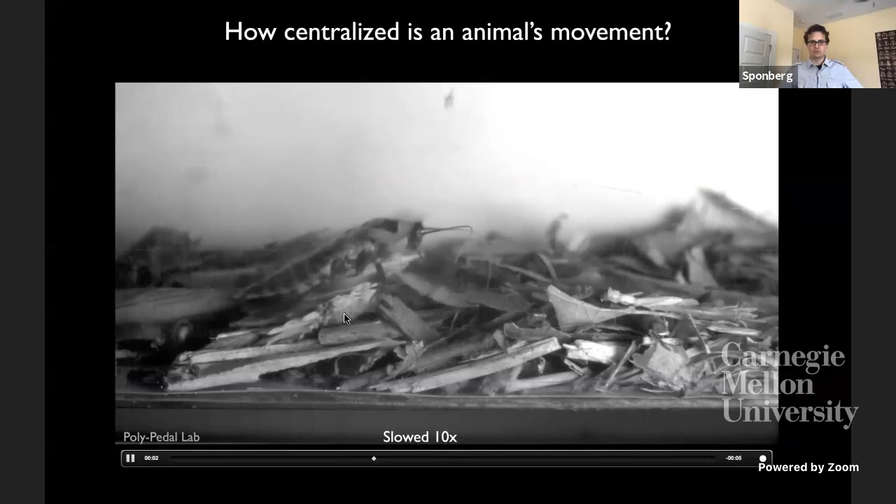So what Isaac wanted to do was ask how centralized is an animal's movement? We do a lot of work with cockroaches and other insects. There's been a lot of appreciation that when animals move across different kinds of terrain, they use different strategies of control. There's been a lot of focus on a feedback-to-feedforward kind of design strategy, where you listen a lot to feedback from your sensors, or you set your plan or model and go. But centralization has been thought to be an orthogonal axis to this organization.

This comes from a review by Phil Holmes, Dan Koditschek, John Guckenheimer, and Bob Full, with an earlier paper with Buehler. The idea of this orthogonal axis hasn't been very concretely defined. Of course, centralization has a concrete mathematical meaning — if we talk about a network diagram with nodes, the centrality of a node is a well-defined mathematical concept. But when we talk about it for locomotion, we mean something like how coupled are the distributed elements that are controlling the movement.

Don't worry too much about the details of these diagrams — the different clocks here are supposed to represent first and second order oscillators. The big thing about the centralized-to-decentralized axis is how much these are coupled to each other. So if we fit an animal, as it's moving, to a set of coupled oscillators, for example, we can define some aspect of centralization using that model framework.

But Isaac and I wanted to ask: is there a way we could assess the degree of centralization that an animal or a robot is moving with, without having to adopt a specific model architecture for it? Is there an empirical way we can measure this, and then assess how it changes as the animal changes strategy, or as we do something different with the robot?

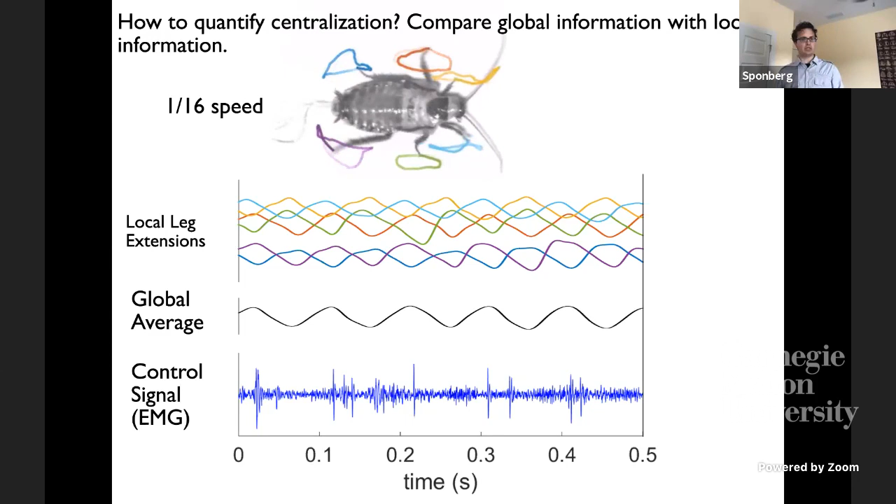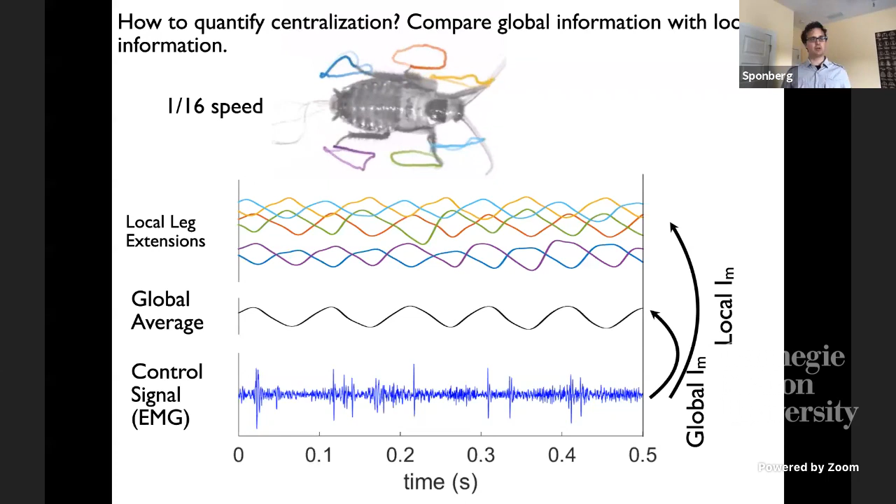And then Isaac tracked the 6 legs of the animal, and he could say, okay, how much local information is shared between that control signal and the state of the leg that that control signal comes from, in this case the hind left leg. And then he could ask how much global information is shared between the control signal and some global state representation, in this case the global phase average of all of the legs.

The advantage of using information is we can think of information in the currency of entropy, right? Entropy is the possible set of states that a signal can obtain weighted by how likely they are to occur. You can represent it by this area or circle here. So these are the possible different EMG patterns a cockroach leg could send on each stride, represented as an area, and there's some area of possible local outputs.

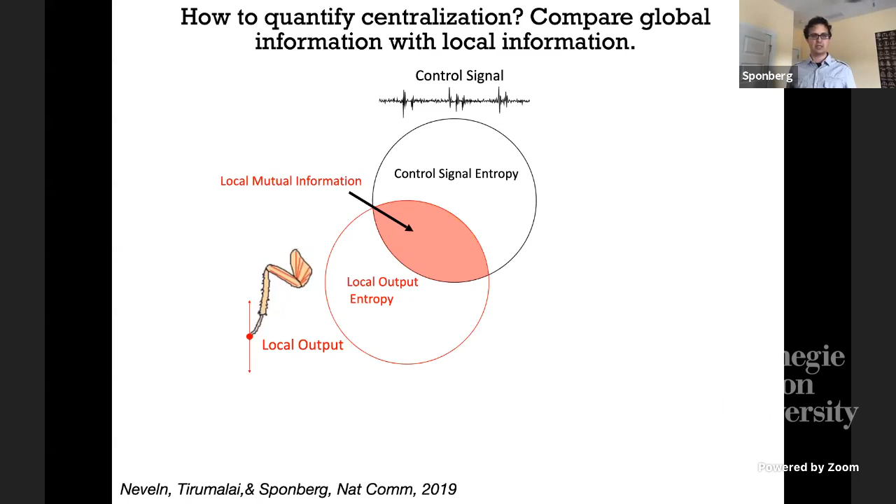And the more overlap between these circles, the more information is shared. So that means if I tell you what specific control signal went out, how well can you determine what the actual output of the local leg was? The more these overlap, the more your entropy of your local output is reduced, the less uncertain you are about the outcome. And so this can be a representation of local mutual information.

We can also do that for the global state representation. So we can look at the overlap between our global state and the control signal, and the overlap there will be the global mutual information.

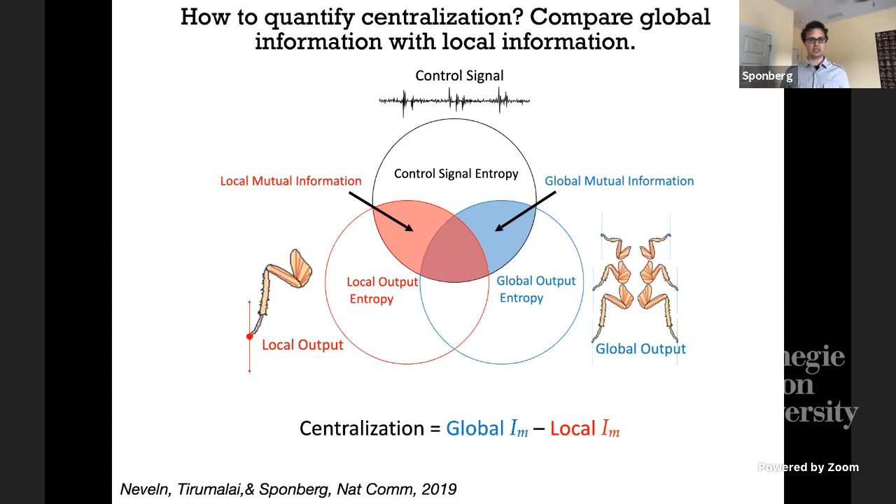And Isaac and I posed the idea that centralization then can be thought of as a difference. And since these are in log units, this is like a ratio actually, between the global mutual information and the local mutual information. So when centralization is positive, it means the control signal tells you more about what the global state of the system is doing. And when it's negative, it tells you more about what the local state of the system is doing.

Interestingly, there can also be redundancy here. This can be measured as what's called co-information. That's because your local state is going to share some information with your global state. Of course, where the leg is will determine something about the average state of all the legs, because it's one of the legs. So there's going to be some overlap here, and that can be captured as a measure of redundancy, the amount of overlap between those regions.

The nice thing about this is we can make those measurements without having to assume any underlying model. We do need a state representation of the system, but that's it. So when we do this for the cockroaches, we can calculate that for many cockroaches running over hundreds of steps with natural variation on low roughness terrain. And what we can see is that those EMG signals in the key control muscles we're recording in the leg convey quite a bit of both local and global information.

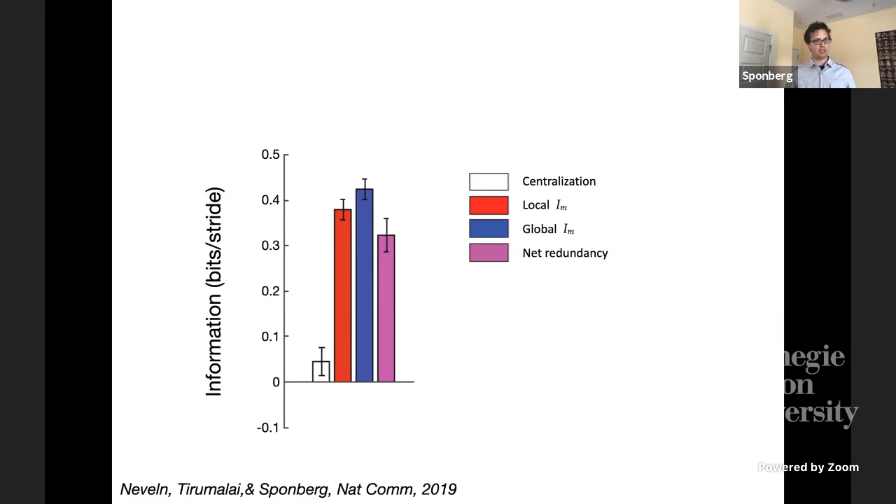But the key thing to take home from this plot is that the centralization is actually net positive. And this has an important implication that demonstrates one of the interesting things you can come across with this technique. The fact that that value, that white bar right here, is positive, means that if I record the activity of an EMG in a single one of the 6 legs, it tells you more about what all 6 legs are doing on average than it tells you about what that specific leg is doing.

That's a little weird if you think about it for a second. It's saying, even though the EMG is contributing to the extension of the limb, because of how coordinated the response to perturbations are in the system, that EMG is actually telling you more about what all of the legs are doing together than that one leg is, from an information standpoint.

And so we think that this is an indication. Part of the reason why we did this with cockroaches is they've been thought to be very decentralized in their control architectures, and we wanted to test that.

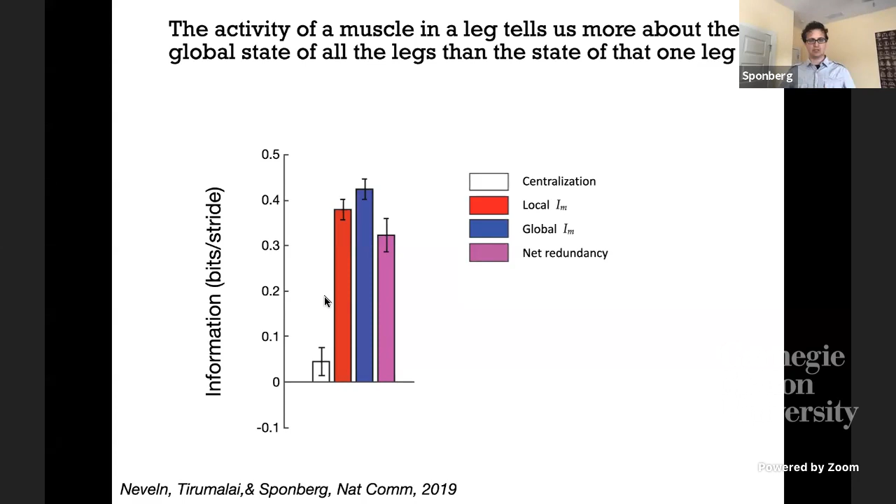So can we make this a little more concrete? Can we say, is this a good measure? One of the other reasons why we did this with cockroaches is this kind of approach has actually been used before, these species have been used before to try and assess centralization.

This was done by Einat Fuchs and Phil Holmes, where they did a very similar experiment where they tracked all the legs, and then they actually fit the cockroach's six legs to a coupled oscillator model. This is sort of like a Kuramoto model with not fully global coupling, but sort of a network diagram of couplings between the different legs. Fuchs and Holmes set all of these couplings to be equal to each other, and you can think of each of the legs as an oscillator connected to each other oscillator.

Each leg, I, is going to be evolving in time with some phase velocity that's dependent on an innate frequency and then some coupling. So if one of the legs gets ahead of where it's supposed to be ahead of this 0.5 phase difference, then the other legs will try to catch up with that.

When they fit models with different levels of coupling strengths, they found that a coupling strength of 79 radians per second tends to best fit the cockroach data set. That number shouldn't have much meaning yet, but the idea is that from these models, they were able to fit a coupling strength, which is one measure, given this modeling framework, of how centralized the system is. So for a coupled oscillator model network, the degree of global coupling can tell you about how centralized it is.

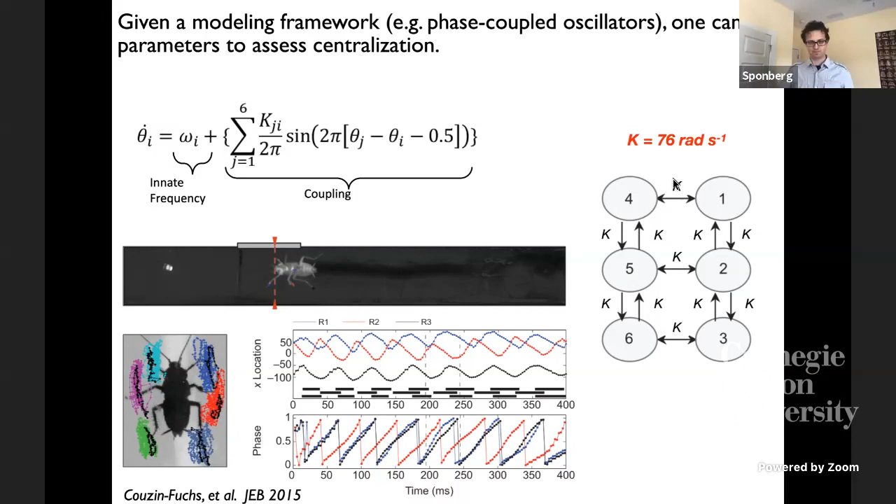You can also do this with order parameters if you want. So what we wanted to do was ask, how does that match up with our data? So we took our same approach, but instead of running it on cockroaches, we actually ran it directly on the oscillator model. We took a coupled oscillator model with similar connectivity.

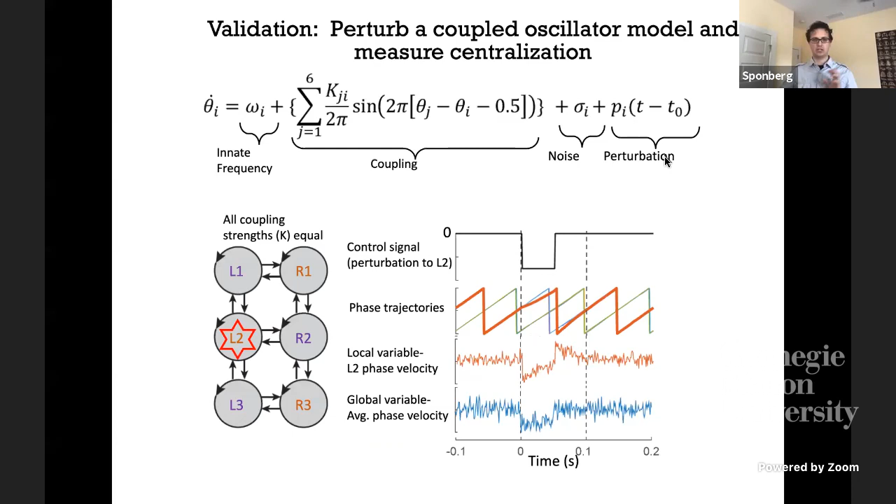We added noise and we added a perturbation to it, and so we could play that perturbation and that actually becomes your control signal. Then you could look at the outputs and ask how they're related to one another. And as we see, the centralization increases with coupling strength, which is what you would expect. This is what we'd expect.

This is with an undergraduate, Amelia, that was in the lab. But interestingly, our value of centralization that we measured purely from the cockroach experiments, without having to use a coupled oscillator model, was about 0.2 bits per stride. And that matches up very well with the coupling strength that Couzin-Fuchs measured when they assumed the underlying coupled oscillator model for the cockroaches. So we get some validation that our empirical measure of centralization can at least recapitulate earlier data.

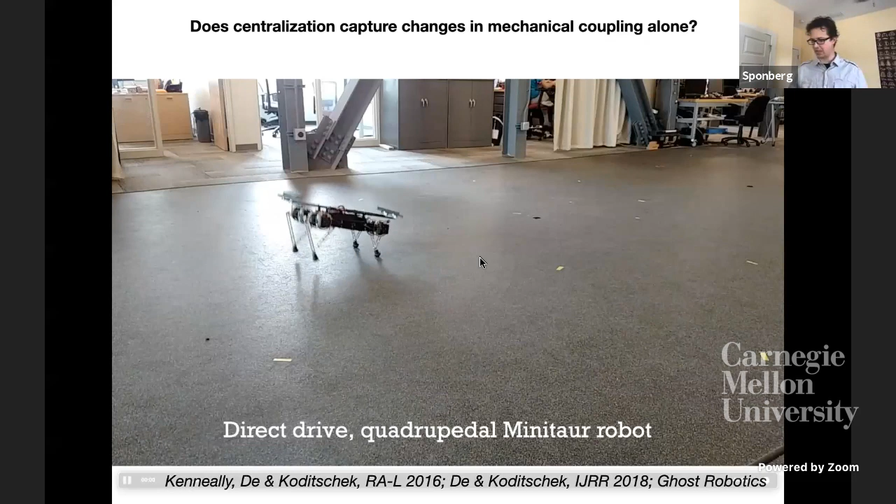The last thing I wanted to show is that this can actually be extended to think of new hypotheses of how the system is working. So we turn to a robotic system. This is the quadrupedal robot Minitaur from Ghost Robotics, developed by Avik De and Dan Koditschek.

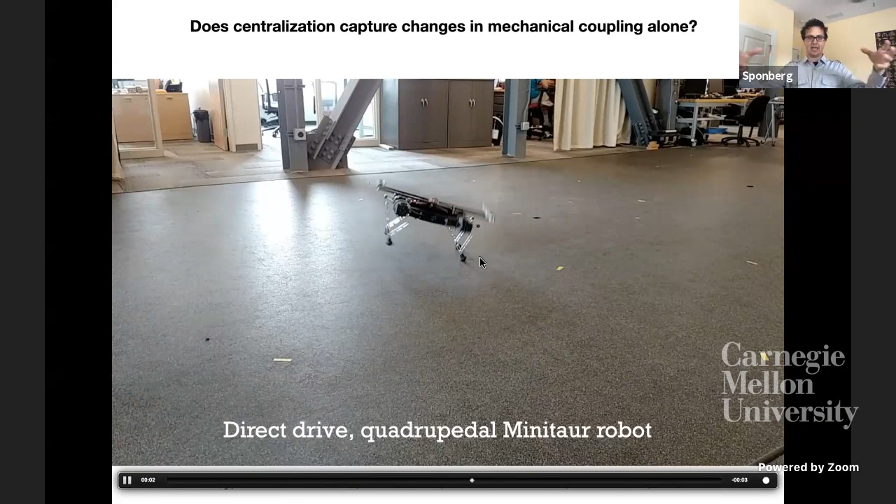The cool thing about this model is it has direct drive legs, so the legs are not fully determined by what the motors are doing, they can be back driven. And it has these masses on a boom that stick out from the top of the robot. By changing those masses, you can change the degree of mechanical coupling in the system independent of the controller. So what you can do is spread the mass—if it's really tight into the middle, then when you apply an impulse to the front set of legs, it's going to cause the back set of legs to move down, because the center of percussion, the stationary point around which the robot rotates, is going to be in front of the hips.

If the masses are really distributed far out, then the center of percussion is going to be behind, and when the front legs push on the ground, the back hip is going to move up. But there's a point right in the middle where the center of percussion is aligned above the legs. And at exactly that point, the front legs and the back legs are going to be mechanically mostly decoupled.

That means they're not going to apply moments to each of the other hips. And so the prediction would be that that should then become the most decentralized point, independent of the controllers being used, since we're changing the mechanical coupling now.

So Isaac ran our information theoretic approach on this. And indeed, what he found is that just by recording the robot as it's moving around, not by going in and trying to model it, just recording the kinematics of how it was moving using a global and local state estimation, he was able to recapitulate this idea that they are in fact adopting their most decentralized control down here when they're having those legs directly positioned below the centers of percussion.

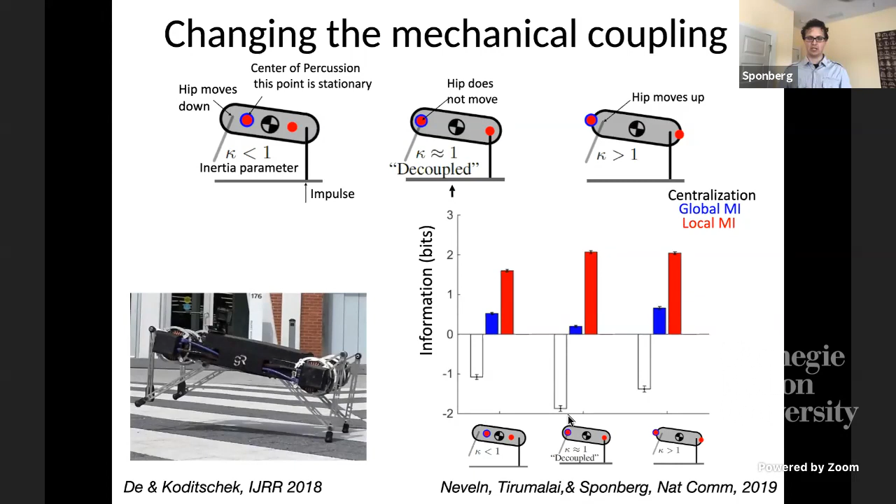And so altogether, we think that this information strategy can be used as a design space here, both for placing animals as they maybe are changing their situations or the environments they're running through, or aging, or having some damage or injury, but also for robots.

So on the left side here, a robot or an animal would be highly decentralized. That means the control signal primarily determines the local state of the individual limb or joint. On the right side, it would be highly centralized. The control signal is mostly determining the global state.

And then on the y-axis, we have the degree of redundancy, going from fully redundant, which would be very stiff systems, to less redundant. And we can put all of our robot, cockroach, and coupled oscillator models on there, and you can see that we can span at least the upper side of this space.

And we think that things like very stiff systems that are very rigidly connected together mechanically, it's very hard to do anything different from your local state to your global state. So those systems are actually going to be highly redundant, not either centralized or decentralized.

But the sort of classic reflex-based control, where you take care of perturbations entirely locally, would be a very decentralized architecture. A sort of very model-heavy control, where you're primarily doing your control based on some central model of what the global state is evolving in time, that would be highly centralized.

And then maybe soft systems actually have this region where there's synergy, where you know something more if you know both the local state and the global state than if you just know them independently.

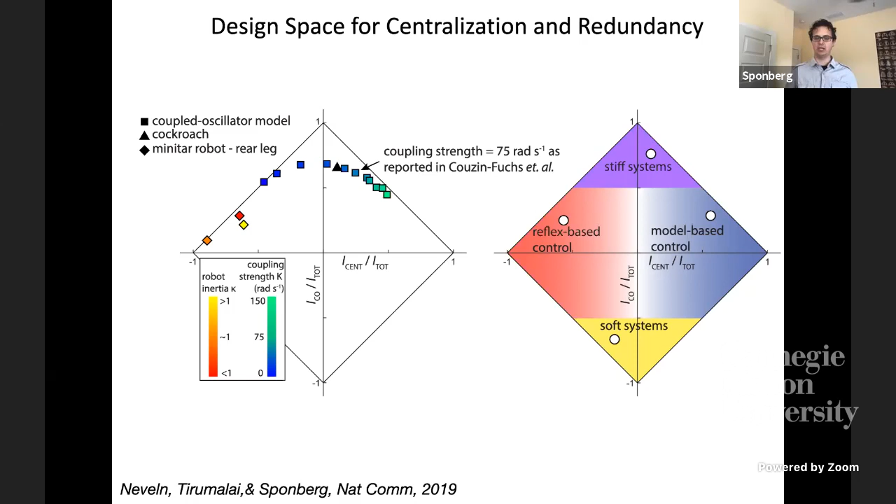So this whole strategy is, we were trying to find a model-free, not state-free, but model-free information-based measure for centralization and redundancy, so we could try and assess this broadly in the systems and ask when is centralization good and when is it not.

We can recapitulate the coupled oscillator model, and we can show that this actually allows us to capture changes in mechanical coupling in a robophysical model. And so with that, I'll just thank the people in my lab and turn it over to questions.

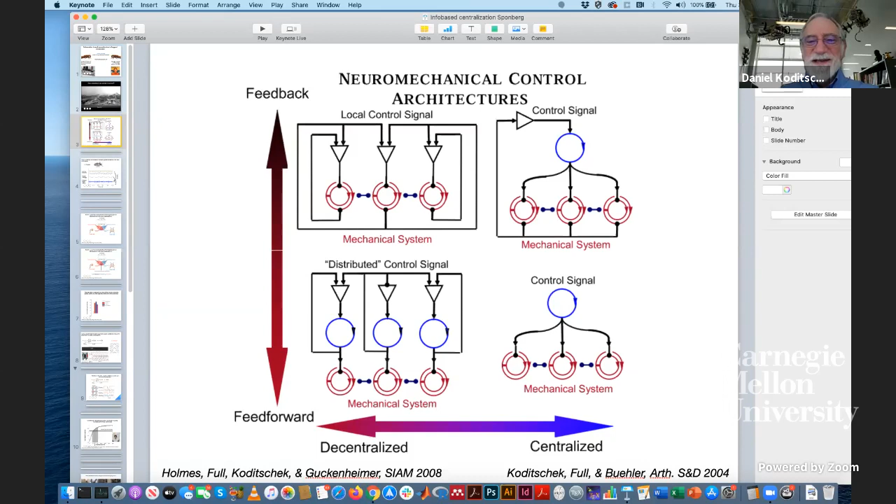I am confused. When Phil set the coupled oscillators thing up around the mid 80s, when these things were first getting off the ground, the presumption was always, quote, weak coupling, such that these Ks are going to be small enough that it makes sense to do this in the first order sense rather than going to the second order, blah blah blah.

What I'm confused about is if we have a relatively small K, an extended phase-based coupling according to Phil's model, I worry that's confusable with a sharp stride-by-stride impulse-like control or mechanical event. If that sharp impulse is happening a lot during a stride, then I can imagine these are going to be easily distinguishable. But I worry a little bit that if you only have one sharp event during a stride, or two sharp events during a stride of very large magnitude, that also integrates out in the information theoretic sense.

Am I wrong to worry about that, Simon? No, I think if I understand correctly, you're saying what if the system is not well described by a coupled oscillator model and instead has these sharp events. Well, it's a coupled oscillator, but it's a very stiff coupled oscillator, right? So sure, yeah, right, it's got these strong mechanical connections.

Or neural, it's doing something more like a Raibert hopper than an Uluc Saranli active damping vertical hopping regulator, something like that. So I think that's a fair criticism of why we might want to be skeptical about fitting a coupled oscillator model to this system. But I'll point out that the information calculation we did up here doesn't care which one it is.

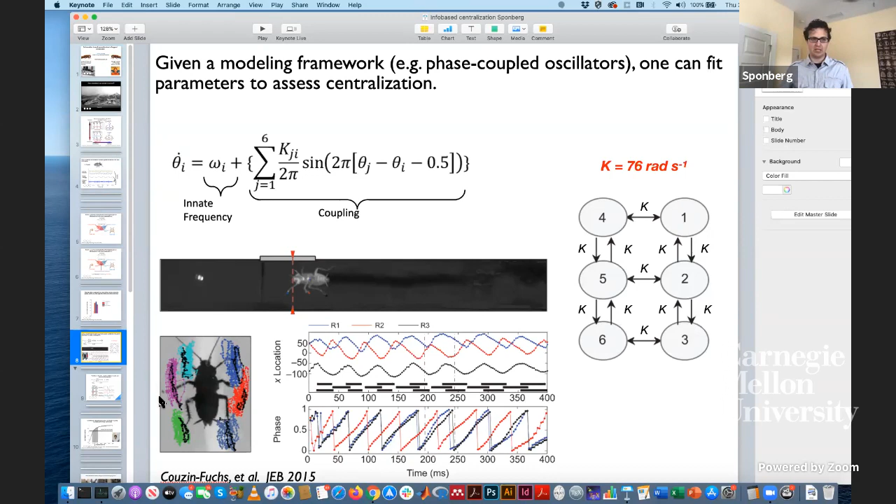But we didn't need to do any of this. If we did it, I showed that the outcome here matched up with what our measurement was independently. But our measurement of centralization was purely from the information theoretic approach. I'm not trying to say this is the only model that would give us that measurement of centralization. I think it's suggestive that we get to the same conclusion that Phil got to in that paper with Einat, but there are a number of different systems that could give us the same kind of centralization.

Did that answer it? Someday, Simon, I want you to invent an assay that'll distinguish between intermittent, spiky, or in hybrid systems lingo, guard-like controls, versus smoother ones. But you can do that next year. That's okay. Well, Izaak did do one thing.

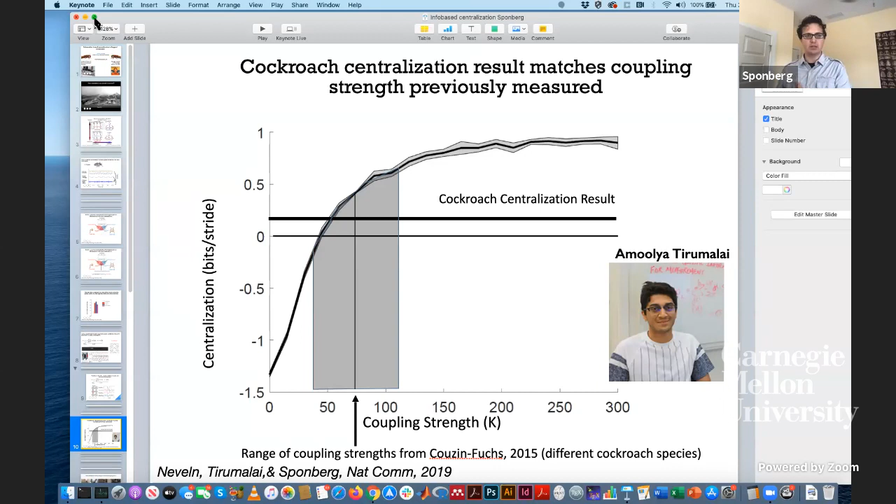One cool thing he did with the cockroach muscles is that because these EMGs have distinct spikes since there are many fewer motor units, he was able to separate the contribution of the individual timing of each spike versus the overall rate average, which may be a first way of trying to get at what you're asking.

Don't read an EMG as impulsive or continuous, that's always problematic. But to the extent that we can talk about the importance of timing versus rate of spiking, the timing ends up conveying most of the information that goes into control in this case, not the number of spikes. So this muscle is not behaving like a simple rate controller. I don't know if that quite answers your question fully, but it may be a step along the way.

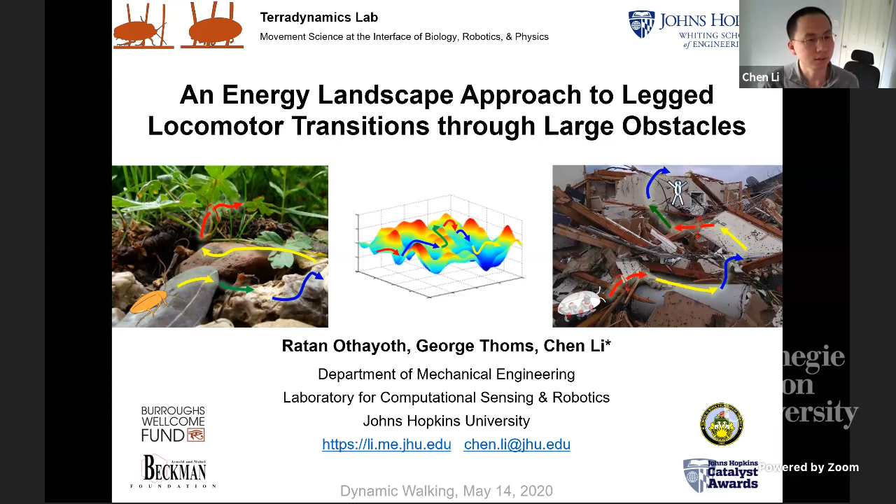We already have many robots, such as self-driving cars, that are really good at navigating complex environments. What they do is create a geometric map and then transition between different driving modes to avoid obstacles to reach their goal. There are some applications where we need our robots not just to avoid obstacles, but actually traverse them, such as search and rescue in earthquake rubble. Our robots are still not very good at making robust locomotor transitions to do so.

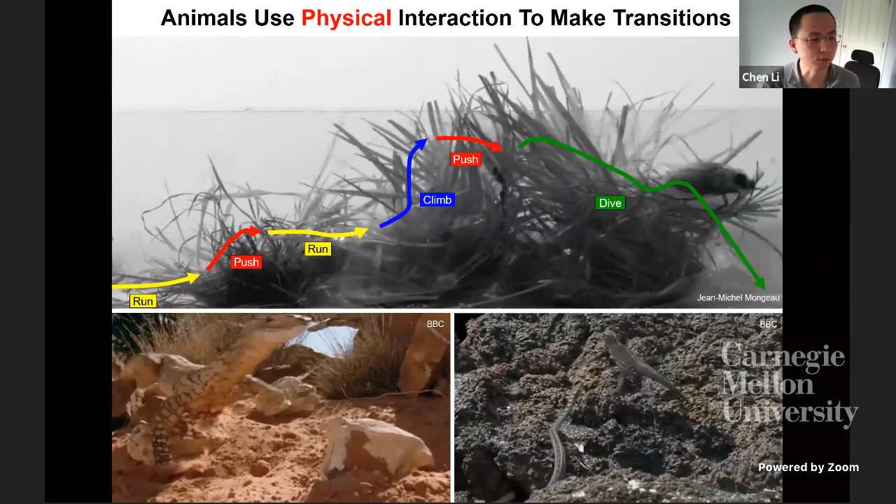This is partly because we have a relative lack of understanding of physical interaction with complex terrain like this. Animals, obviously, are very good at using physical interaction to make robust locomotor transitions to traverse all kinds of environments. So in a previous study I led as a postdoc, we looked at how cockroaches can traverse dense vegetation, such as grass-like beams, and found that they transition among many different modes, forming these multi-pathway transitions.

So here in this talk, I'll give a short highlight of a recent study led by my PhD student, Ratan, focusing on one particular transition between what we call a pitch mode and a roll mode, to reveal how we can begin to understand the emergence of locomotor transitions from physical interaction.

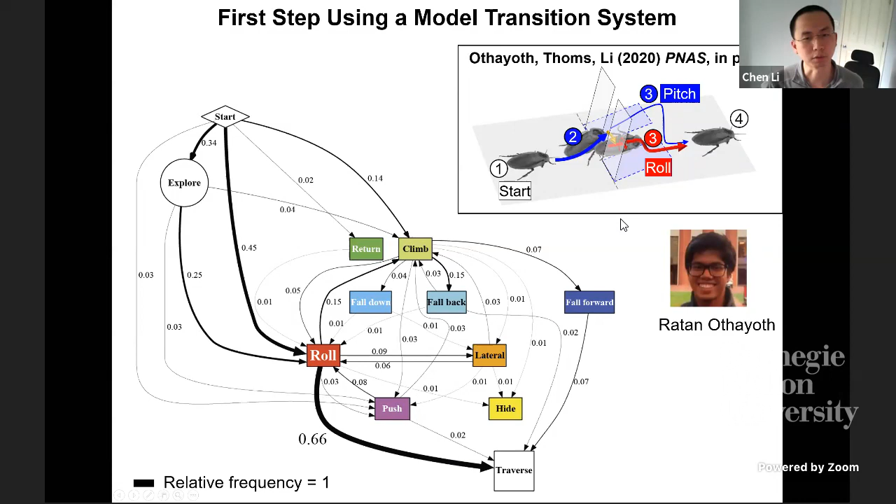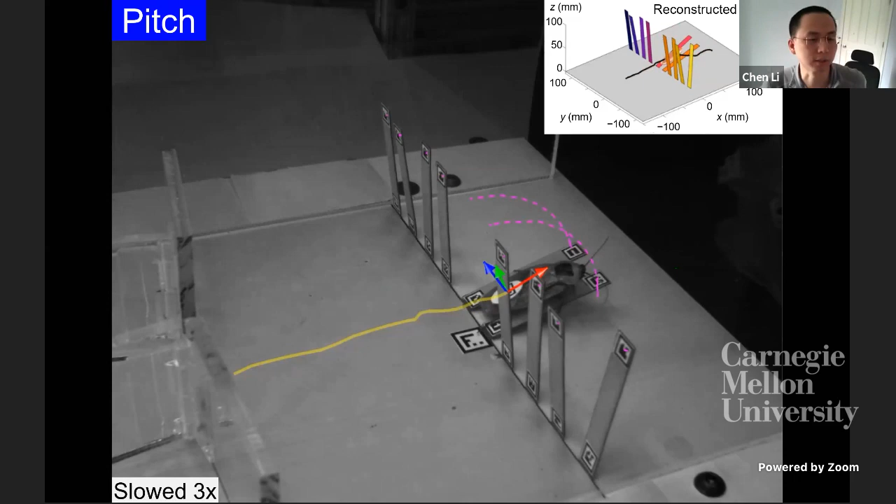Here's the animal doing the pitch mode - it's really just pushing down the beams, in which process its body pitches up slightly. And here's the animal initially trying to push across the beam, but quickly transitioning to rolling into the gap between the beams. This is what we call a roll mode, transitioning from pitch to roll mode.

So what might be happening? We came up with the simplest physics model we could think of by completely ignoring the system dynamics and treating the animal just as a rigid ellipsoid, and the two adjacent beams as plates with torsional springs at their base so that they can bend.

Now you can write down the total potential energy of the system, which is the sum of gravitational and elastic energy. Depending on where the body is and how it's oriented, when it's close to the beams, that's going to bend the beams by a different amount, as well as change the center of mass height. So the total potential energy of the system is a function of the position and orientation of this body.

So what's been plotted here is just a cross-section of the potential energy landscape over the body pitch and roll degrees of freedom when the body is very close to these beams.

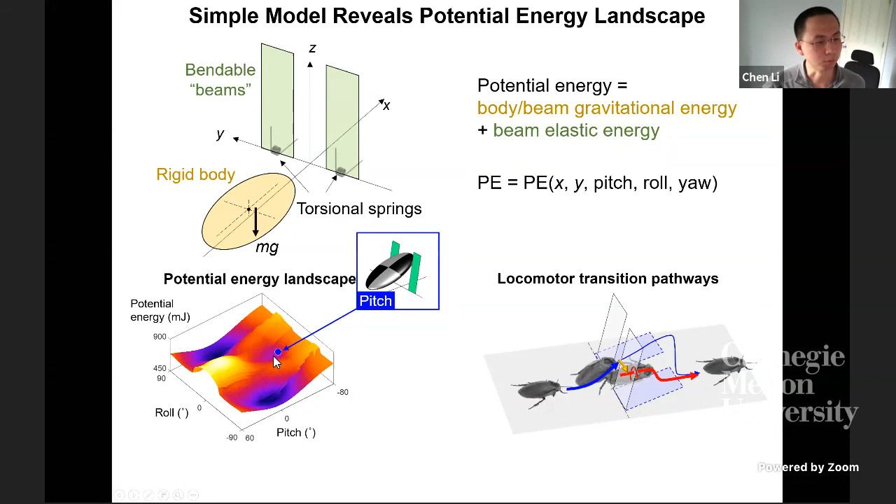You can see that these three local minima basins - here in the middle, there's one in which the body pitches up slightly without rolling, if the system state falls to the very bottom of that basin, which looks like this. Then you see these two other basins in which the body, if it falls to the local minima, would then roll either to the left or to the right. These orientations are reminiscent of what we observe in the pitch and rolling modes of the animal traversing.

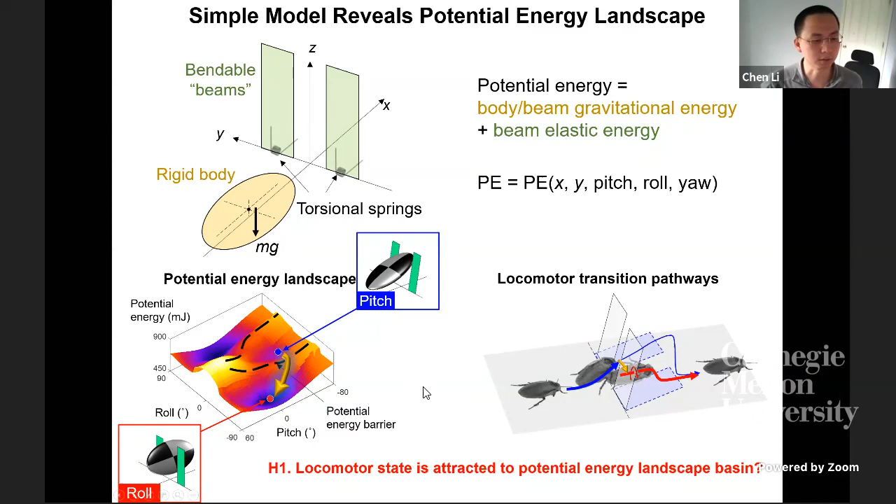So perhaps the locomotor state of the system is attracted to these basins on the potential energy landscape. In addition, when the animal makes the transition from the pitch to the roll mode, it has to overcome these potential energy barriers separating these basins. So perhaps a locomotor transition is a barrier crossing transition.

With this, we were greatly inspired by another field where people have applied energy landscape modeling to understand protein folding. This has been really successful in understanding how such multi-pathway transitions emerge from the physical interactions between all the atoms in the protein. You can see there's an analogy to our system, so we think this can be a useful approach to understand locomotor transitions in complex terrain.

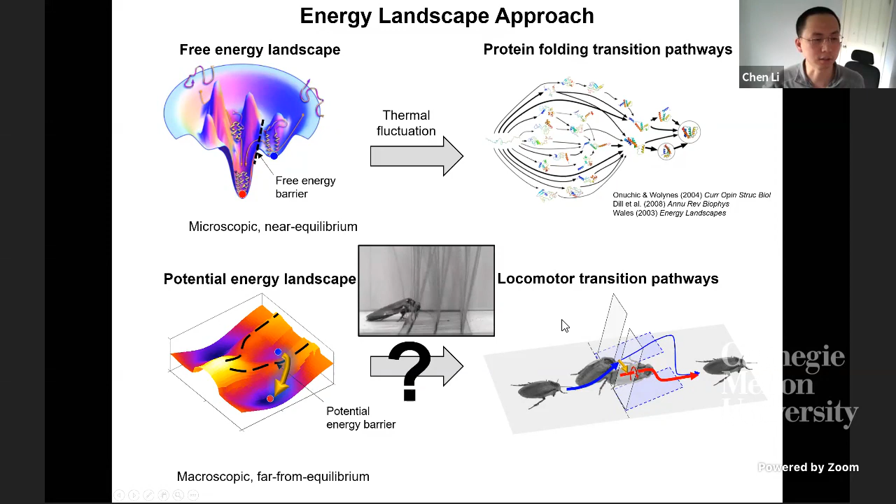But there's a caveat. For protein folding, which is a microscopic system, you have thermal fluctuation that helps the system cross these free energy barriers to make transitions and eventually fold. But for our system, which is macroscopic, thermal fluctuation is obviously not relevant. However, if you look at how the animals traverse these kinds of environments, you can see that because of their legged pushing with the ground, they actually oscillate quite a bit. So that might be serving the same function as thermal fluctuation, helping them cross potential energy barriers.

To test whether this is the case, we developed a simple robotic physical model, which is free to pitch and roll in response to its interaction with the beams. Then we can push it forward and apply oscillations to test whether that helps.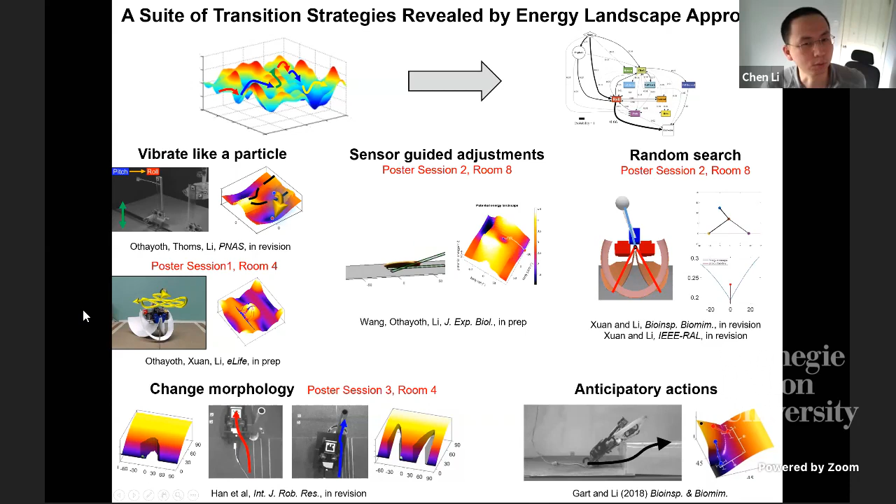So we have confirmed all our hypotheses, which I won't repeat. I just want to quickly point out that this vibrating like a particle is just one very naive strategy that we have identified. We have found several other strategies already in multiple systems when using this approach to understand locomotor transitions in complex terrain.

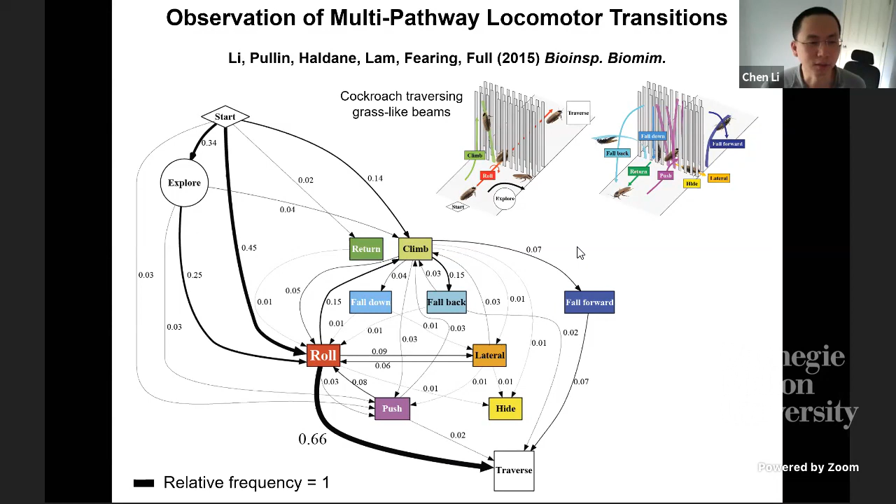We haven't, so in this study that we did, the beams are stiff enough so that when they run into it, they're forced to stop. And the more recent study that we showed, we did vary the stiffness of the beams, but we still focused on understanding this particular pitch to roll transition, so we didn't look extensively at if they can simply run into the flimsy beams and run up.

Yeah, I think what you mentioned brings up an important point. We are not claiming that this potential energy landscape can help understand all the possible locomotor transitions in this kind of environment. We are still thinking how to define this, but right now we have a concept of an energy landscape dominated regime, defined by the fact that during each propulsive cycle, the kinetic energy or mechanical work you can generate is small compared to the barriers that occur in certain directions. So your movement along those directions would then be strongly dominated by these energy landscapes.

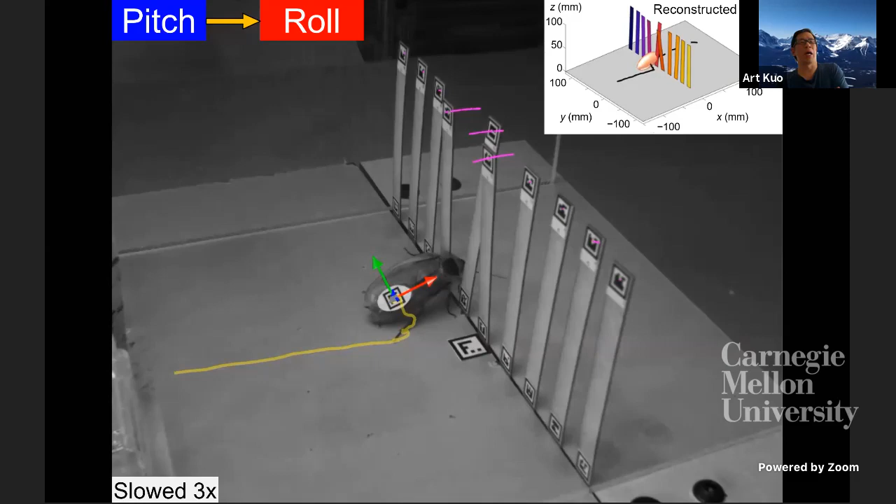Trying to unmute. Okay, my question is about how literally you mean potential energy, because it seems with these springs, it's not potential energy in the sense that the cockroach is getting it back, right? It's essentially converting that potential energy into motion of the thing wobbling around afterwards, whereas there's some kind of potential energy that you do get back - you go up a hill, you might be able to slide down the hill. Do you mean an abstract sense of energy, or do you literally mean potential energy, a conservative quantity?

Yeah, we do literally mean a conservative potential energy, and that's how in our model we don't have any term that's made up or any fudge factor. It's all just directly writing down the total potential energy of the system. But I do want to point out that when we perform this energy landscape analysis, we can see the system state is attracted to these basins, which show up as locomotor modes, and then the transition between basins show up as transitions crossing these barriers.

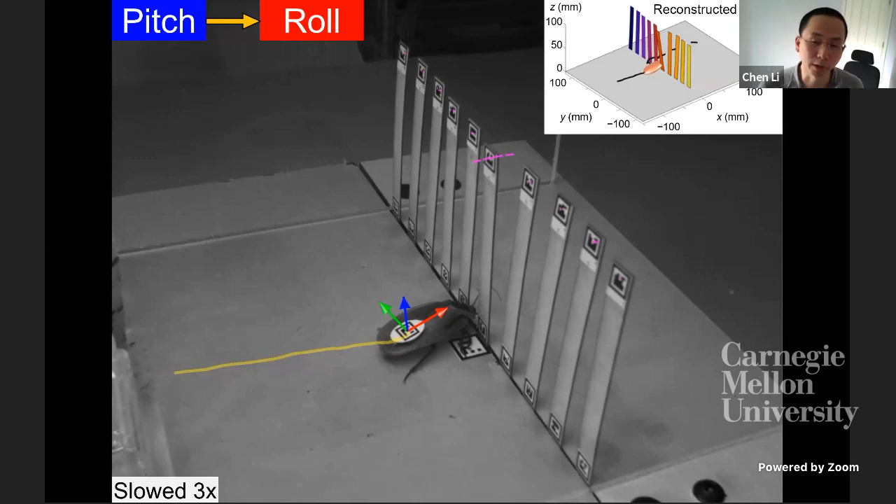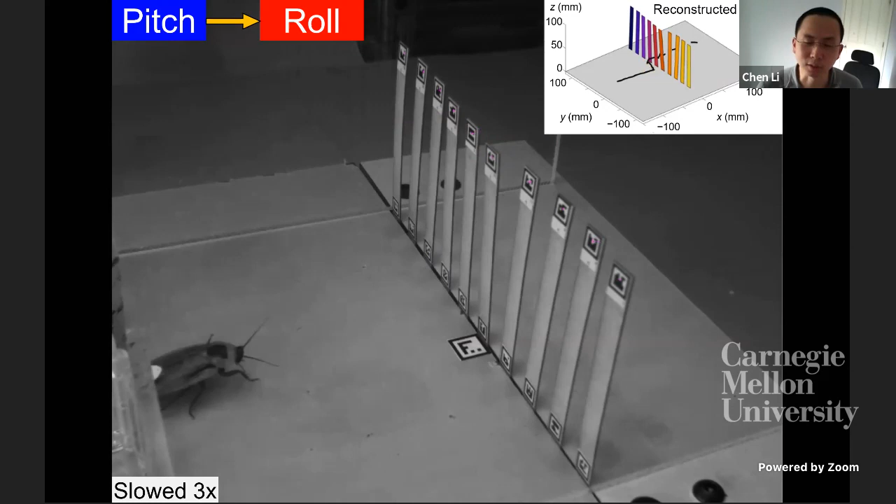But this is only true in this case - only true before the animal has crossed the beams. When the animal has crossed the barriers, the beams will bounce back, and in that phase we no longer reconstruct the energy landscape. So what does this mean? There's dynamics involved afterward that our model doesn't take into account.

Okay, so if you had a more literally dissipative barrier, say damping, then would you still render that as potential energy? I think so, but I think if you really want to understand the dynamics, you would have to then add dissipative terms.

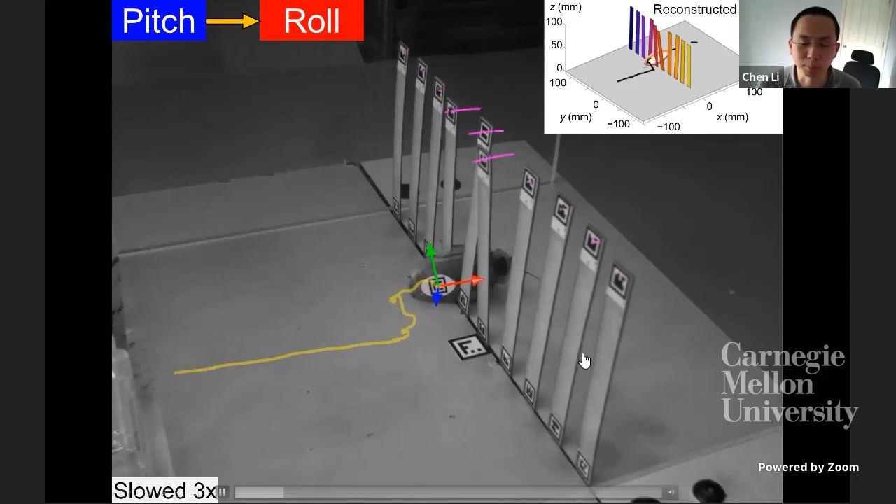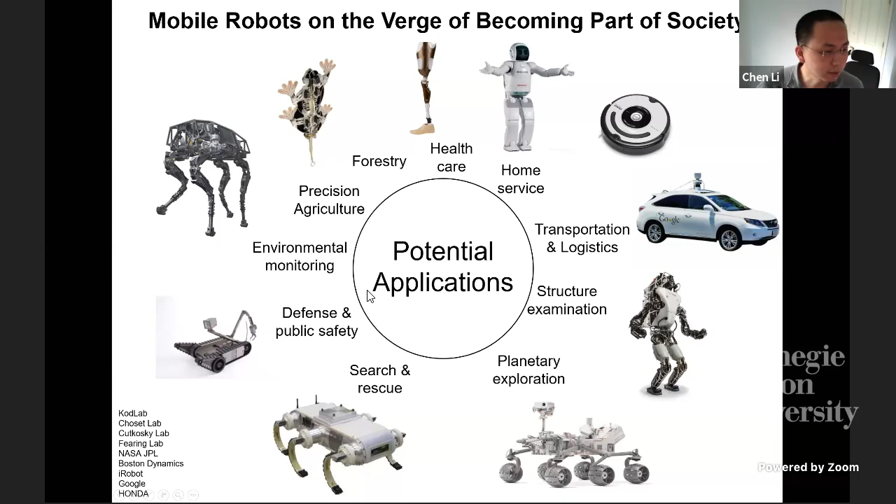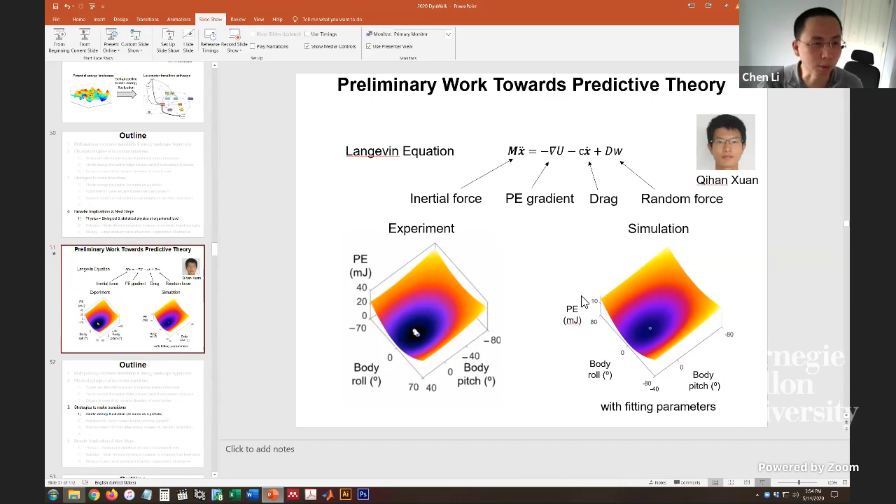So this potential energy landscape only takes into account all the conservative forces in the system, but you certainly have propulsive forces and dissipative forces that are not conservative. So this is just a very preliminary modeling.

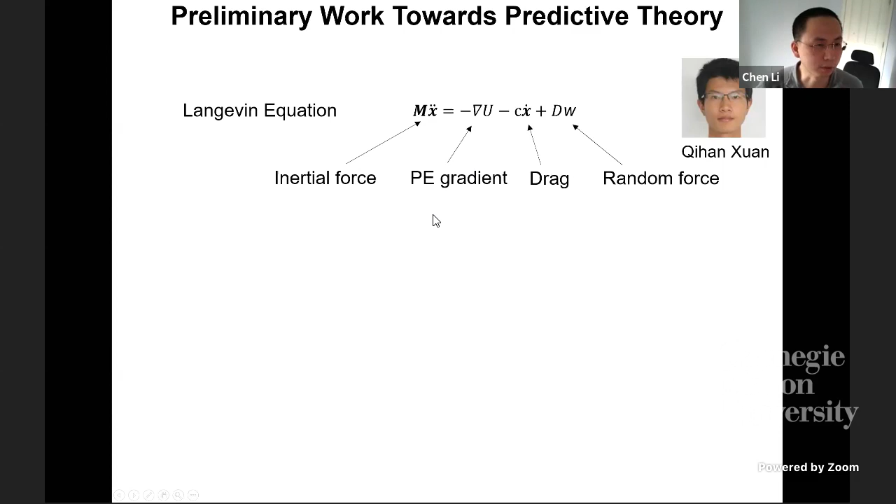So here's what I didn't show, but here are many trials in which the animal either are stuck to the pitch basin or to the pitch mode and transition to the roll mode. So we can actually make up force terms that describe non-conservative forces, such as this drag here, and you also have random force, and then using Newton's second law, write down the Langevin equation to perform a dynamic simulation. You can see it does qualitatively give you the behavior we observe in the experiment, but we're still very far from knowing how to exactly model all these terms that are made up. Yeah, but that's what we are thinking of working on next.

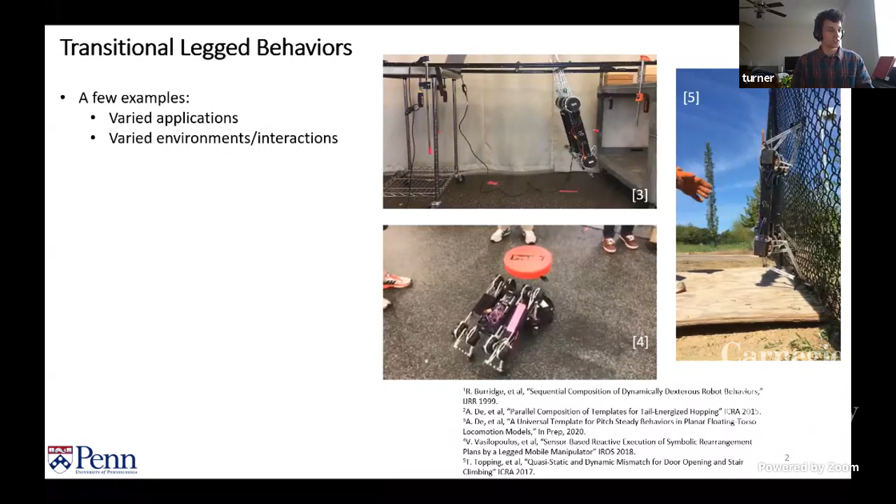And finally, here's one where we're going to try and manipulate this stool and move into this kind of stool pushing regime. So this is already three different applications in three examples, and three different environments in three examples. You can imagine that the space of transitional things is going to be really large and really specific if you're making up a new controller for each one of them.

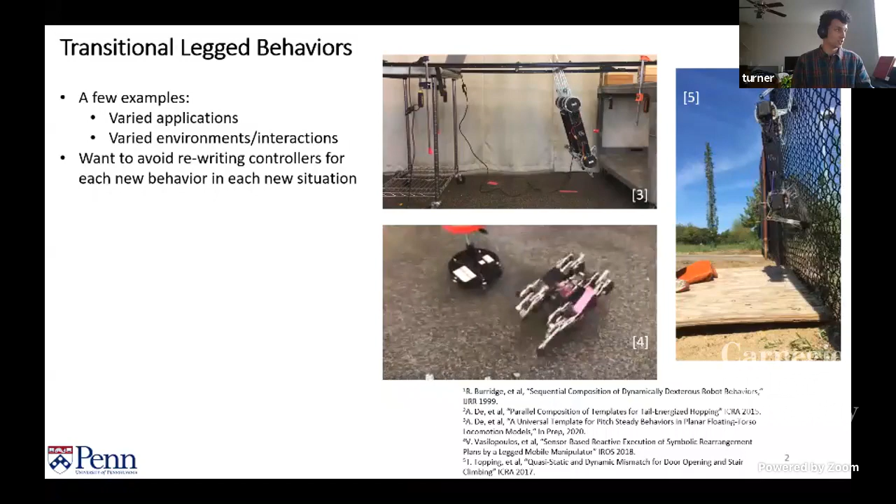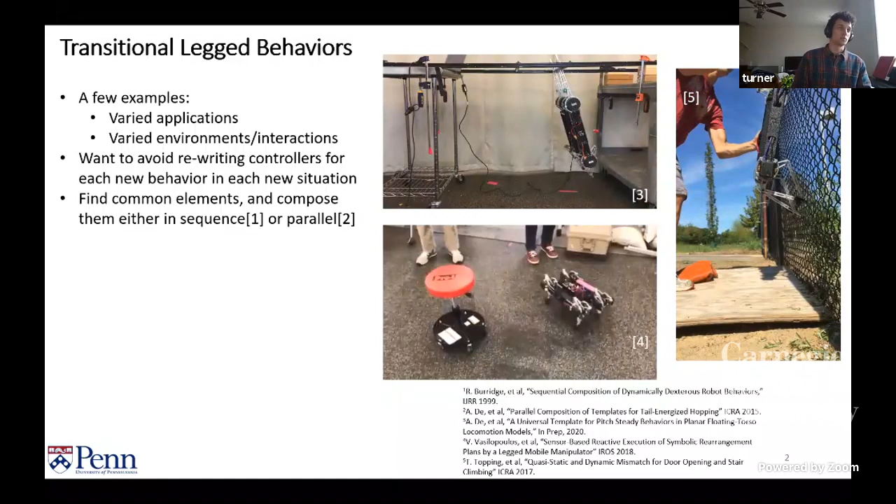So what we really want to do is avoid rewriting things for these new situations and instead recycle the pieces that we find to be common. The key is to find these common elements between them and figure out how to compose them, I guess in the hybrid dynamical system sense. We can compose them either in sequence, one element follows another, or in parallel when possible — maybe we can do two things at once with the robot or platform.

But there's some challenges to doing this. One of them, and probably the one we're most focused on right now, is getting some kind of formal guarantee for each one of these elements.

This looks like a Lyapunov function or a basin in the world we're thinking about. The main reason for this is when you go to compose these things, these behaviors are very one-way. And if you're going to make a mistake, if you're doomed, you want to know when it's appropriate to stop trying to compose the transitional behavior and when to do something else, because you know that the next thing you're going to try is inevitably going to fail. We're also going to rely a little bit more heavily on the underlying models.

A lot of reactive control prides itself on being robust to perturbations in the model, but again, due to this one-way nature, we're doing a lot of deadbeat-like things, if not deadbeat things themselves. We want to be able to rely on our model a little bit more than we have in the past.

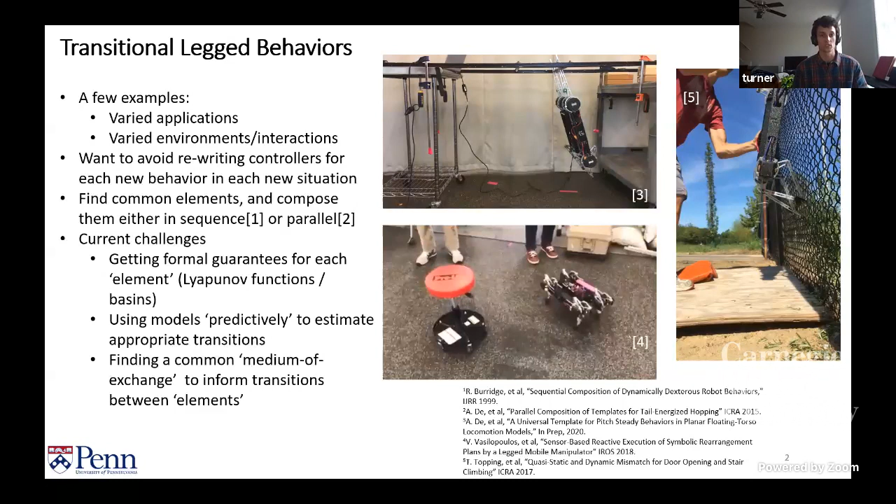And finally, the last key here is finding a common medium of exchange — what quantity can we measure that's going to link up these seemingly disparate pieces of transitional behaviors, such that we can reason about creating what we call in hybrid dynamical systems literature guards and resets that make sense.

So we'll start to talk specifically about this work here, which is opening a door, and this is really similar to something we did back in 2017 in terms of the way it's composed. We'll jump right into that — I'm just going to show this very simple diagram here.

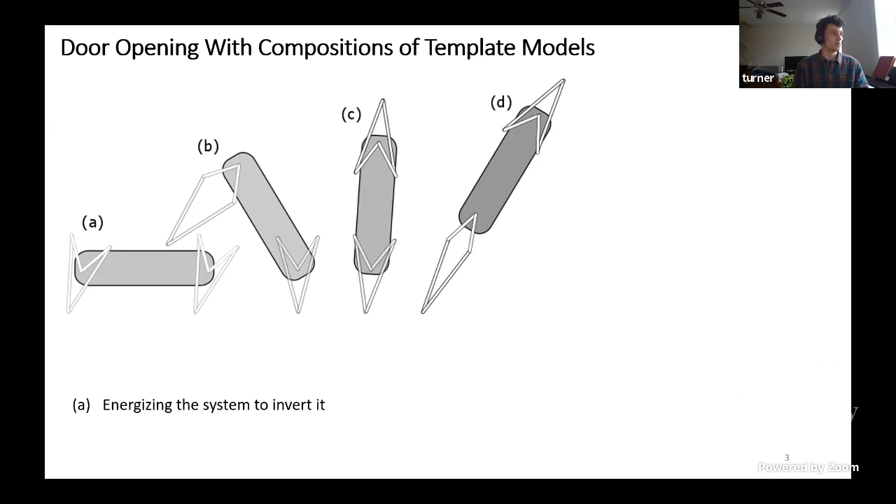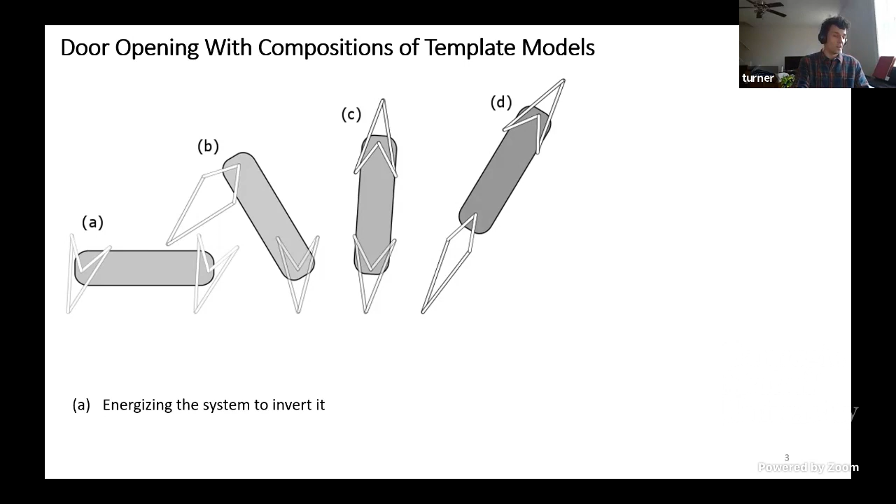There's this first moment here where we're injecting energy into the system. I'm really happy that Chen Li just went before me talking about these barriers — to operate in mode C, you need to overcome this literal energy barrier that you start out in, mode A. So you need to inject energy, excite the system, and then once you've added the energy, you need to handle it in a way that you wind up in the configuration that you expect.

So we kind of mimic pendulum dynamics here. Then once you've done that, you can do that leap toward the door. And once you're airborne, try and figure out how to handle the doorknob — we're not even going to focus on that here.

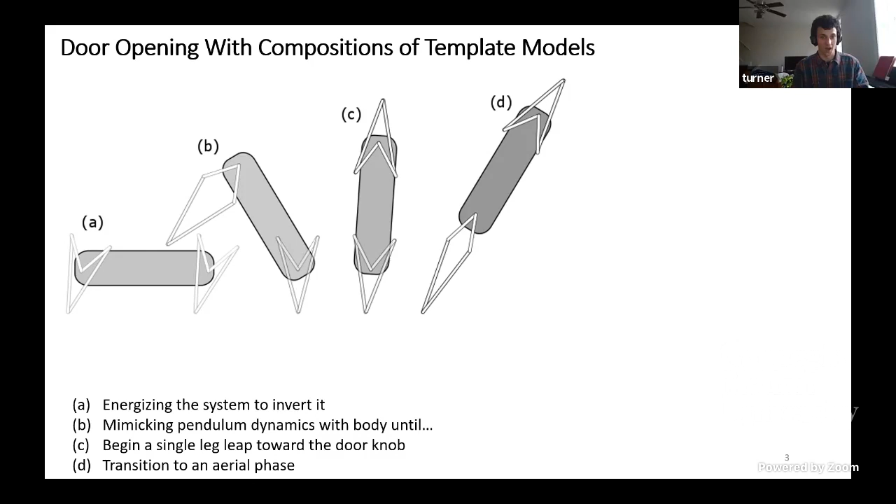So here's a frame by frame, or a composite image, of the kinds of things we're doing. Mostly we're going to focus on two parts: how we transition from this first ghostly looking image to the one that's vertical, and then from that vertical one to the one on the doorknob.

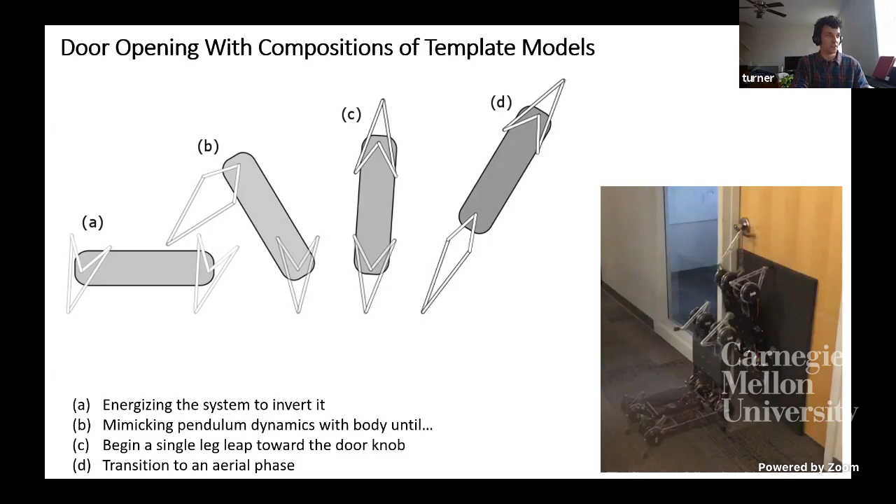In the past, we did this by carefully tuning the system, recognizing that we knew something about the states, something about what the guard conditions look like between A, B, and C, but not really having a formal way of understanding it, nor any hope of adjusting to significant perturbations our robot was experiencing. Maybe we added a sensor payload, and we didn't know which way to tune these numbers.

So what we've done here is taken that same ABC structure, and instead started to apply templates to them.

This is the only one we're not really going to talk about formally, but we can imagine the toe as being a point particle manipulator. We like to think the legs are massless, so we can pretend this is just a first order dynamical system with some workspace. The whole point of this behavior is driving the workspace around to get close enough that it can manipulate the doorknob.

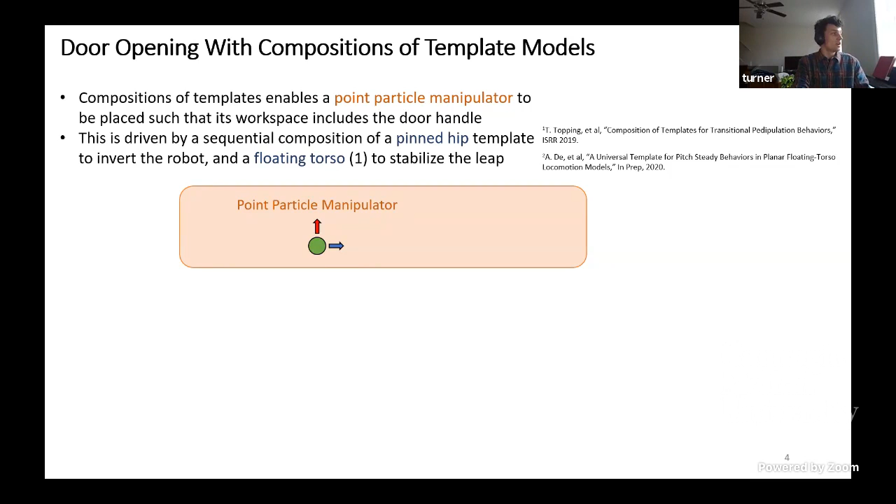So how do we do that? First, we've got a template we introduced recently called the pinned hip template. It's really nothing more than trying to keep one of the hips fixed in the world frame so we can treat the body of the robot like a pendulum. And then we get these nice pendulum dynamics.

At first, when it's active, when we're injecting energy, we get this control input U. We're just trying to excite the system to the point where we have literally some amount of joules in it that we're okay with to move on. We'll see what I mean by that in a second.

But once we have an adequate amount of energy in the system, we just keep behaving like this pendulum. So now the dynamics have no input control. The reason for this is because we're able to make some kind of prediction here with a one degree of freedom system.

If you're adding energy to a one degree of freedom system and it's not leaking out in other places, you're going to be able to understand in the future when you have more potential energy, what you're going to be able to do.

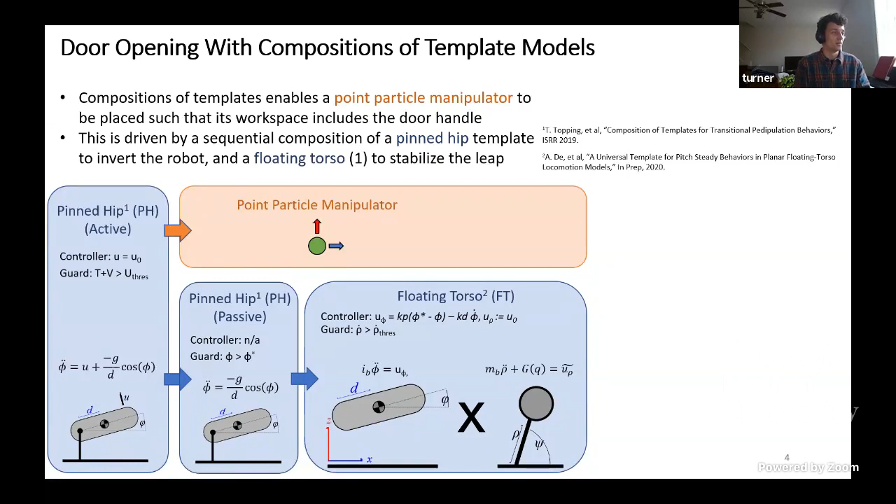That allows us to predict the kinds of conditions for this next piece, the floating torso piece. I regret I won't be able to go into detail, but it's basically an idea that you can separate the pitch control from an underlying inverted pendulum-like template. We want formal properties about when you can start using this template, under what conditions. Empirically we have some idea, but we want formal analytical conditions we can predict back in that first step.

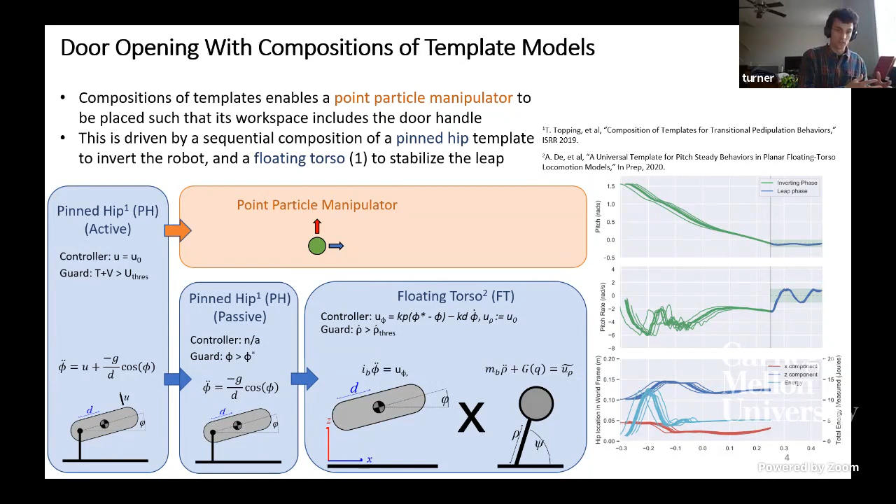Once you've done that, you can use this new template to regulate the pitch through the leaping phase, which was a cause of a lot of failures when we were doing this years ago. Now we can actually see these results.

The things I want to point out: one, we have actual feedback control going on within the stride, if you think of the leap as a stride, on the body pitch. It's a very short amount of time, looks like 0.2 of a second or a little less. You can see the velocity isn't damping out quite at the rate we'd like, but it's staying somewhat regular, and empirically that's going to be good enough to do this door opening thing pretty reliably.

The other thing I want to point out on this chart is that, again, we have that energy condition that sets up this feedback controller for the floating torso.

Even with a kind of bad estimate of energy, which is really laggy due to the noisy estimates from our IMU, we're still able to kind of dial this in. And if it works well, energy isn't going to be mass specific, right? We're looking at sort of velocities and positions in pitch, so we don't have to worry about perturbations to the system in that regard.

So in concert, we're hoping that these kinds of things allow us to have a much more robust behavior. And there's still room to improve. Obviously, we're not doing anything in this passive pinned hip phase here, we're just kind of coasting until it's okay to start the next one. What we'd like to do is start adding feedback there too, because it might be the case that after you've injected energy, some adversary comes by and bumps into your robot and slows it down. You'd like to be able to, if there's anything you can do, start to feedback on that situation. And if there isn't anything you can do, start to change the sequence, change into a different template that's more appropriate. Maybe abort the behavior or try something different altogether.

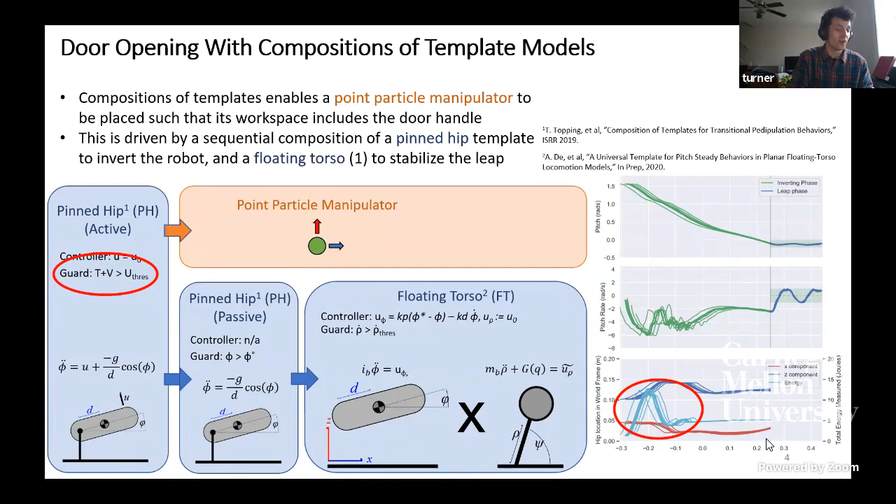So I'm trying to keep this to the 5 minutes, so I'll say one more thing actually before I jump to the questions.

So ultimately, when we build these kinds of behaviors, how are we going to use them? This is kind of the key about understanding these basins and having these formal Lyapunov functions around each one of these templates. What is going to be the unifying principle to control them, to assemble them? Is it that point particle manipulator? Can we describe it in such a way that the desired motion of a point particle in space can inform some smart controller on how to assemble these templates in a way that we can track it well?

Or is it some kind of unicycle that has these extra features, a unicycle that's able to jump or something like that? I don't know. It's difficult to imagine what the right kind of unifying structure is, but it's also exciting to even get to think about this at all. This is the first time in my career that I've been even close to having this problem be the next one up. So it's been very exciting.

All right, so with that, I'll turn it over to questions. Yeah, thank you very much for listening.

All right, thank you, Turner. So given the schedule, we have time for maybe one question here. Looks like Simon Sponberg has a question. Go ahead, Simon. I was just curious how you choose the sort of granularity of when we do these transitions from one template to another versus when we think of it more as a continuous thing. So I've always had this question of, for behavior, how do we think of behavior as this continuous thing or as a sequence of discrete circumstances or certain discrete cases or discrete models that are working.

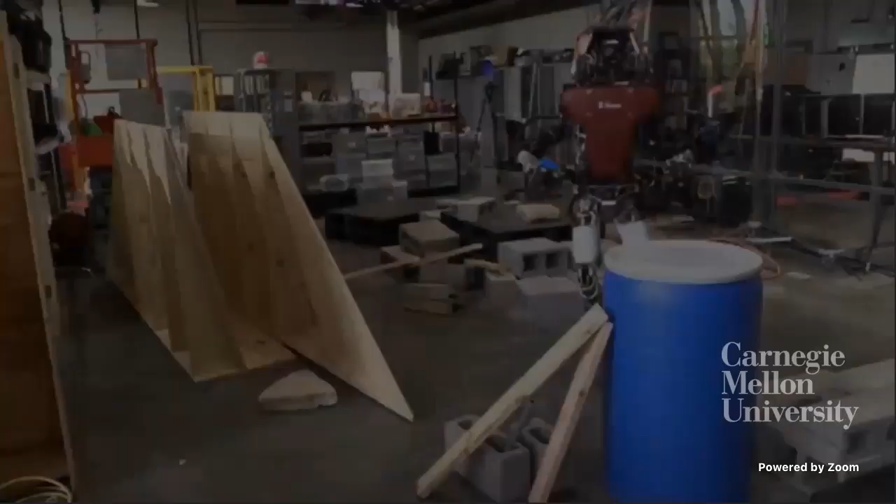But we'd like to kind of speed up this whole process, because it's not quick enough, and one of the biggest parts of that is actually just this time that it takes in order to plan. So you can see here at the beginning, it just takes a minute in order to build a model of the environment and then come up with a plan.

So the first part of that we're kind of looking at is actually breaking up our footstep planner into these two stages, so that we can use first a body path in order to get through the world, and use this to kind of drive where we determine our contact sequence.

Then one of the things that we noticed was in order to actually get a model of the environment, the multisense on the head of the robot just wasn't working while we were moving. The data was just too noisy. So instead we added this Intel RealSense to the pelvis, which we're able to use to build these planar regions in the world as the robot's actually moving, and we can use those to plan individual steps.

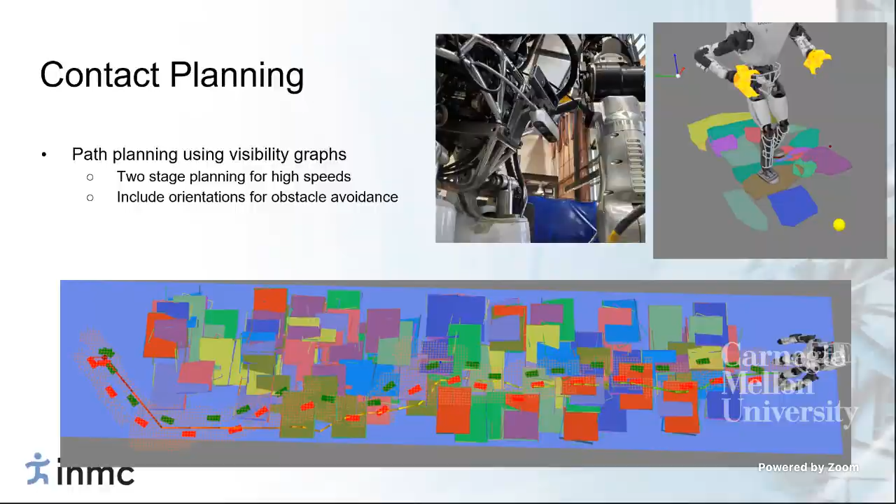And so if we kind of just do a really quick algorithm in order to pick and place these steps along these planar regions, you can see that it was starting to work pretty well. Right now we have an operator actually kind of confirming every individual step, saying, okay, that one's good, that one's good. But it's starting to get to this mode where it can just continuously pick where it wants to step over these cinder blocks.

One of the things that we saw, though, is that a lot of these steps aren't what you would call the best location. Some of them are hanging off the cinder blocks due to just noise in the system.

So we decided to start looking into this continuous rotation detection and cropping, to be able to figure out actually when you put the foot on the ground, because you don't really have a skin on the underside of these feet. All you can do is sense kinematically the rotation of the foot and then where the center of pressure is.

So we're detecting that rotation by kind of sensing the angular velocity and the total amount of rotation. Then we're extracting actually from the foot where that edge of rotation is by looking at the kinematics as well as the center of pressure history.

And then we're saying, okay, well, which part of that foothold do we want to throw away? The part that we get rid of is the part where we tried and failed to put the center of pressure. And then we keep the part where we tried and succeeded. So when we tie that in, it works pretty well.

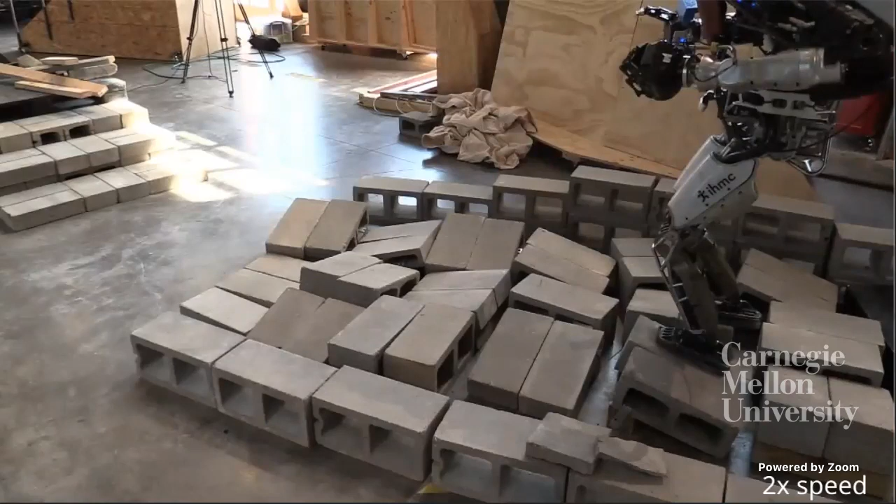The robot's able to walk over these cinder blocks. Here we've actually told the robot a couple of bad steps along the way directly, saying step here, and the foot kind of rotates on the surface, but the robot's able to pretty quickly adapt and crop that foothold off and keep walking.

The next big part of our current efforts is progress on our robot Nadia. We're aiming for it to be this high degree of freedom robot that's relatively lightweight, relatively because those metrics always increase, but also pretty durable. We've made a lot of progress, and we're coming pretty close to a fleshed out design for the lower body.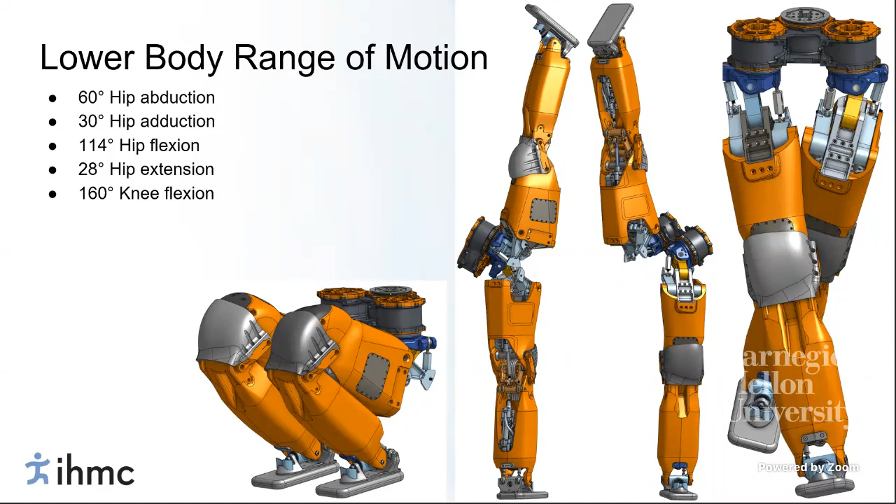Here, when I say high range of motion, we're able to hit pretty good numbers. We've got about 90 degrees of total range of motion on the hip ab ad, and then about 145 on the flexion extension, while still maintaining about 160 degrees on the knee. So we're able to do these pretty big, flexible motions.

Part of that's enabled by our actuators. We're still using the Moog hydraulic actuator, a very integrated smart actuator. We also designed our own electric actuator for the hip yaw and spine yaw that you see here. With that, we're thinking we'll be able to achieve these kind of crossover motions like you see on the far right.

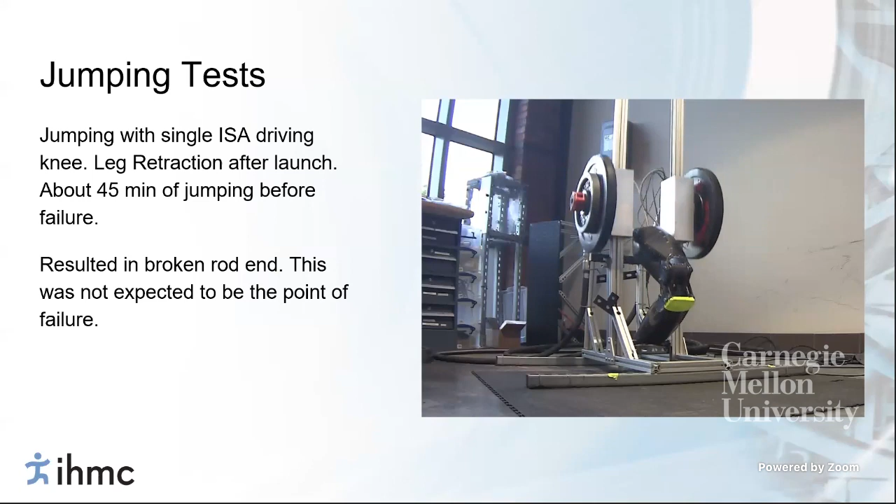We've actually managed to build a prototype of it, and here we've got that prototype leg doing jumping. It was able to jump for about 45 minutes with, I think, about 125 pounds on there, until eventually the rod end you see poking out actually broke. We've replaced that in subsequent designs, but we weren't really expecting that to be the point of failure. Pretty happy, because that means the carbon fiber shells we used weren't the issue. So that's a nice bonus.

The last part of a lot of our work is our exoskeletons. We've been doing about 10 years of exoskeleton development. We've actually been able to stick with Mark, who you see here on the far left, throughout the whole process, from the Mina V1 all the way to our newest one, which is Quix.

You'll notice we've kind of been adding powered joints as we go. We went from just the hip and knee powered, then in Mina V2 we added the powered ankle, which we used at the 2016 Powered Exoskeleton Competition in the Cybathlon. In the newest one, we actually added powered abduction adduction on the hips, and we're really excited to use that in our upcoming projects.

So we've got the Cybathlon in 2020, as well as the Toyota Mobility Unlimited Challenge. We're hoping that by having that additional degree of freedom, we're able to use some of this frontal motion to reduce the loading that Mark, our pilot, is actually having to do with his crutches when he shifts his weight from side to side.

We have a great team that goes into making all this work possible. This is actually a year-old picture at this point, and unfortunately we weren't able to get a new one.

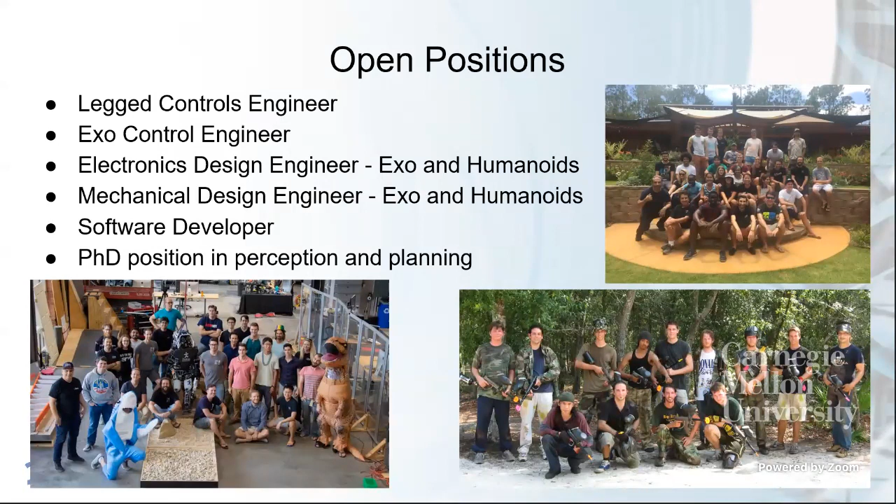So one day when we were testing, we actually went back and changed the powered joint to act like a passive spring, and he was only able to complete the obstacle course for the competition once through, in about 3 times as long, before being completely exhausted. It kind of is intuitive when you think about it, the force that he's having to exert through his arms through the crutches rather than through the powered plantar flexion in that situation.

And so, because we are talking about a device that's meant for individuals who are paralyzed from the waist down, I think that the additional powered degrees of freedom have really made it more user-friendly and more usable, especially from an endurance standpoint. Again, that's anecdotal. We have not looked at the metabolic costs. We're not really set up to do that.

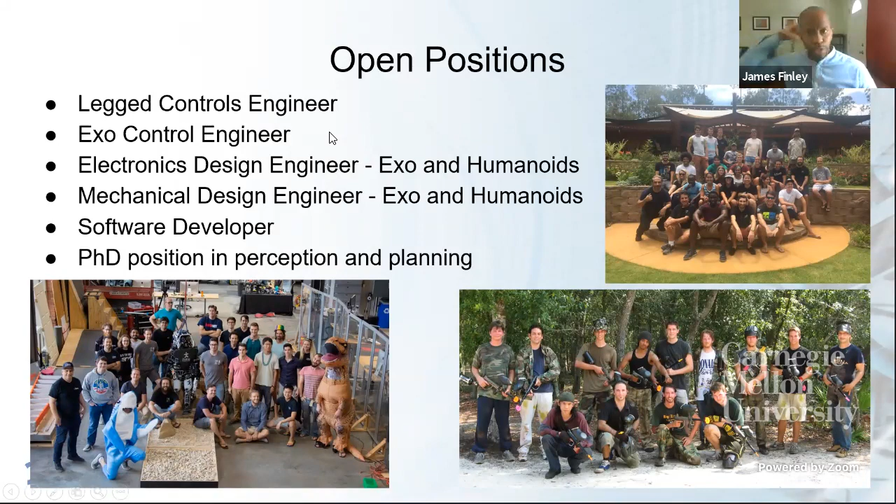Thank you. Thanks so much. I'm going to turn on my screen. Sure. Is it all visible? All good?

Yes. Well, today I'd like to show you some results of several experimental studies that we have done over the last 5 years that relate to gait parameter selection in both level and uphill walking. And these studies were inspired by some really cool experiments in locomotion, at least in our view.

The first set is the studies from Bertram and Ruina that nicely explained how, from the metabolic landscape shown here, you can predict the preferred velocity given a particular or imposed frequency. And you can actually get these preferred velocity and frequency relationships. And they furthermore very nicely explained that these relationships depend on which gait parameter you impose.

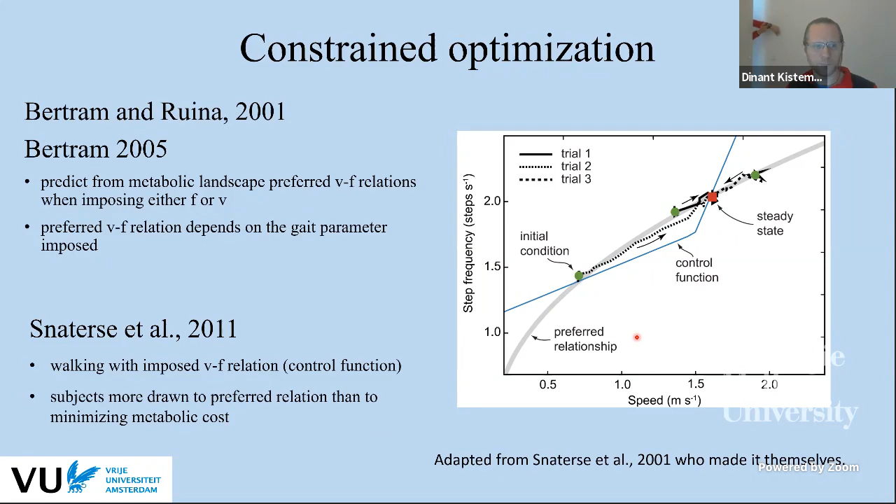And I chose 3 for today to share some results. This is the general overview of the experimental setup.

It's pretty basic, besides the large treadmill. We have a really nice large treadmill, and the cool thing is that we can have a pretty natural way for participants to select their own walking speed. If they speed up, they walk to the front of the treadmill. We have a feedback system in place that speeds up the treadmill and brings them back towards the dead zone in the middle, so they can very naturally select a velocity.

For a relevant measure of energy expenditure, we calculate and measure the metabolic cost of transport for level walking. And of course, if you want to climb a mountain, metabolic cost of transport won't bring you to the top, so we have for that the metabolic cost per vertical meter.

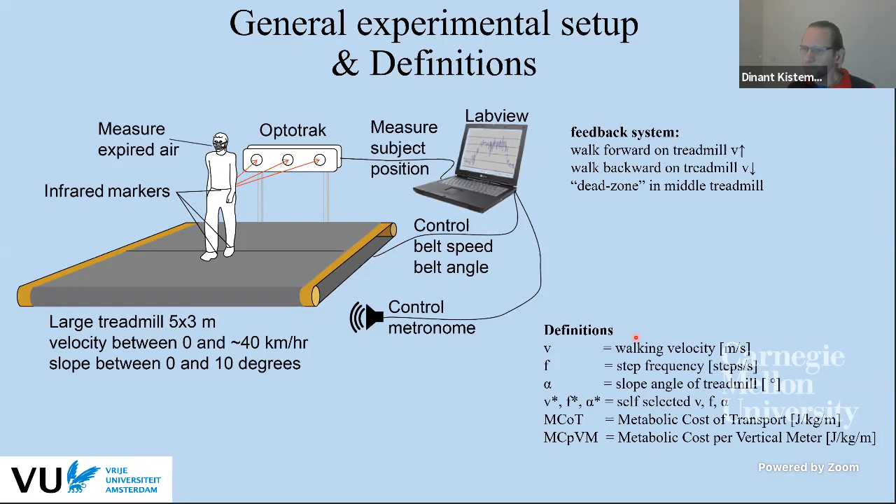In the first study, we sort of replicated the Snaterse study. In the first experiment, we found the velocity and frequency imposed, preferred velocity and frequency relationship, and constructed a velocity-imposed and frequency-imposed constraint function.

There's no real time to go into details, but the general thing is the following: we have a constraint function that intersects the preferred relationship in 3 points, namely P3 here, the preferred walking point, which is the lowest metabolic cost measure, and P1 here.

The general idea is that when walking is habitual rather than optimal, people would, when this constraint function is turned on, start walking with a step frequency and velocity that is either around P3 or around P1. But if they would online minimize metabolic cost, they would end up at the preferred walking point.

So let's just see what subjects do. Here I have one subject. I hope you can all see this. We have a frequency-imposed constraint. After 60 seconds, we turn on the constraint function. This blue dot is the participant's step frequency and the velocity of the belt. You see that basically pretty much straight after we initialize the constraint function, it jumps towards this intersection here.

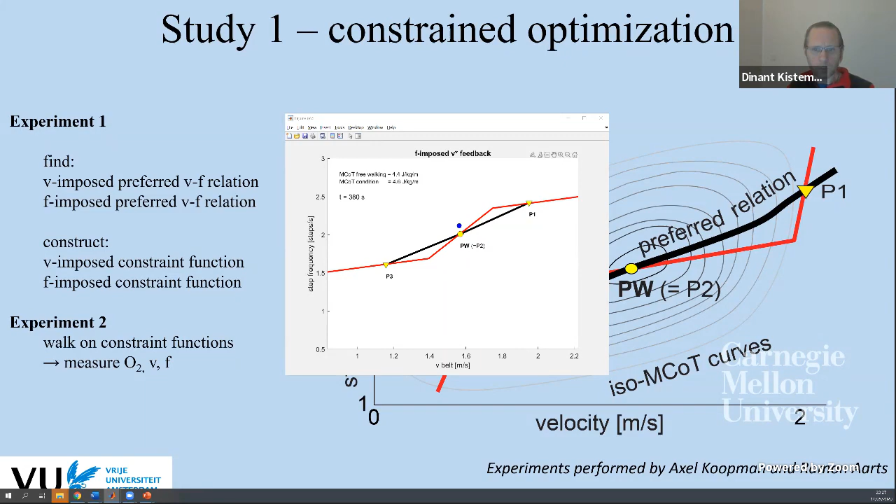So what's the general result? We found that all subjects were able to walk at the preferred walking point with the constraint function turned on, when given feedback about either the preferred velocity or the preferred frequency, and that the constraint functions, importantly, did not change the metabolic cost of transport.

This is with the imposed constraint function and feedback, but none of the participants walked at the preferred walking point when the constraint functions were turned on but they were allowed to do whatever they want, and as such they used quite a bit more metabolic energy than necessary.

So then we thought, okay, but what about the selection of gait parameters under completely novel circumstances? We did a large experiment in which we also addressed slow and fast adaptation, but the main experiment was the following.

We had participants walk with a 2 kilogram mass at each of the ankles. We had them walk for 2 minutes at 4.5 kilometers an hour, and then after 2 minutes we bumped up the speed to 5 kilometers an hour for 36 minutes, and then we looked at the adaptation in step frequency and the metabolic cost. So you see here, the step frequency.

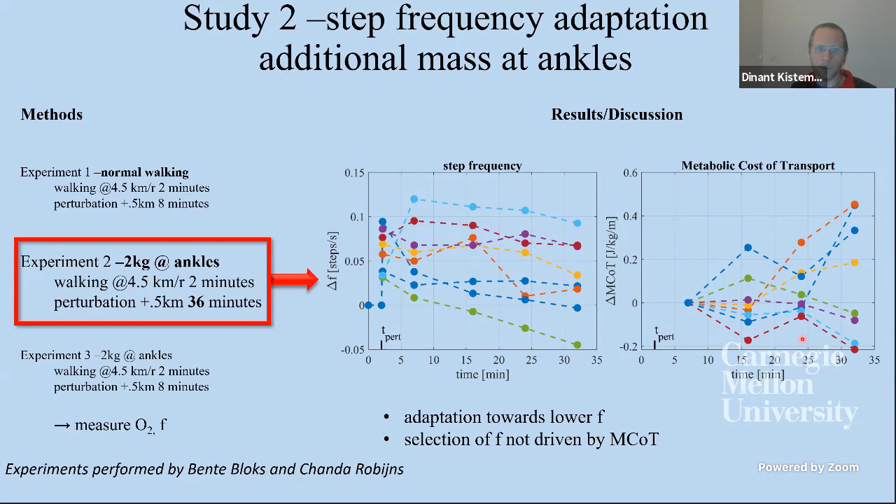So we had an experiment where we also controlled the angle of the treadmill. We measured the preferred velocity at a bunch of different slopes, up to 18% or 10 degrees. We measured, for a bunch of velocities at each slope, the oxygen consumption.

And then our main experiment was that we said to a participant, why don't you just walk 100 vertical meters? We provided them feedback about the amount of vertical meters traveled, and you can just do whatever. You can go up or down in slope, or you can speed up, whatever you want. And then the question, of course, is what these participants do.

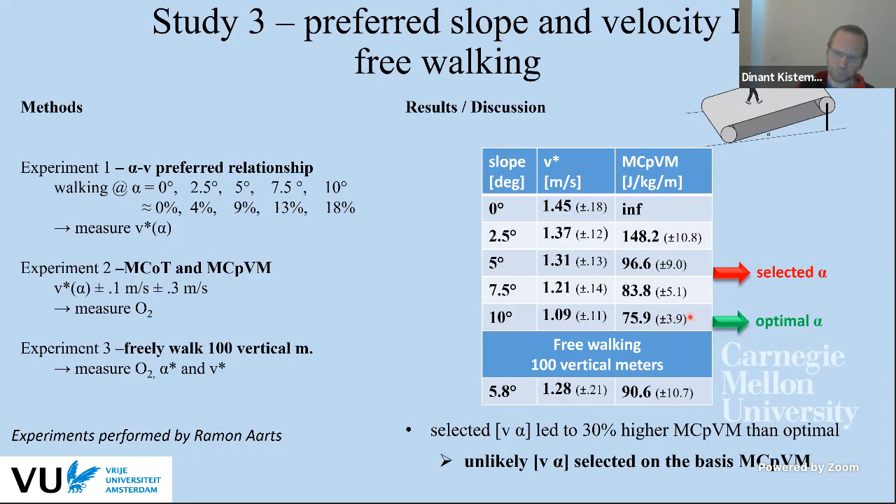So that brings us to the general discussion. Based on these three studies and the other studies that we have done, we see that metabolic cost is not a key determinant in gait parameter selection, at least not on the short term, and not in novel situations.

And step frequency adaptation occurs, but without an accompanying change in or lowering of metabolic cost. And also not in choosing the optimal slope, because the preferred slope is by far not similar to the optimal slope.